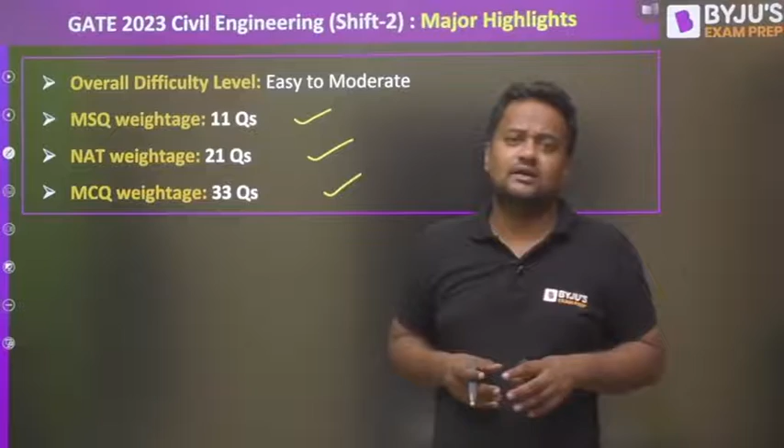This ratio is expected, that most questions will be MCQ, then NAT, then MSQ. Regarding the distribution, it is same as the forenoon shift, and almost same as any other year. Engineering mathematics is always 13. One change is that strength of materials weightage is a bit higher here. In the last 5 years, strength of materials weightage was not much, 4 or 5 marks, but in this paper it is 8 marks. Apart from that, geotechnical will again be highest, and environmental engineering is 13 as expected. So everything is as per convention.

Comparing forenoon and afternoon shifts, mathematics of 2023, and of any year, has to be 13 and 13 from now onwards. SOM is more in shift 2, hydrology is same, engineering mechanics was only in shift 1. Geotechnical engineering is almost same, structural is almost same, surveying is almost same. So the rest of the subjects have roughly equal weightage in shift 1 and shift 2.

Now let me go to each of the questions of strength of materials, geotechnical engineering and surveying, so that you get detailed solutions. After me, other faculty will take their respective subjects in the session. I hope this session gives you an idea about the GATE exam and helps in your better planning for upcoming GATE years.

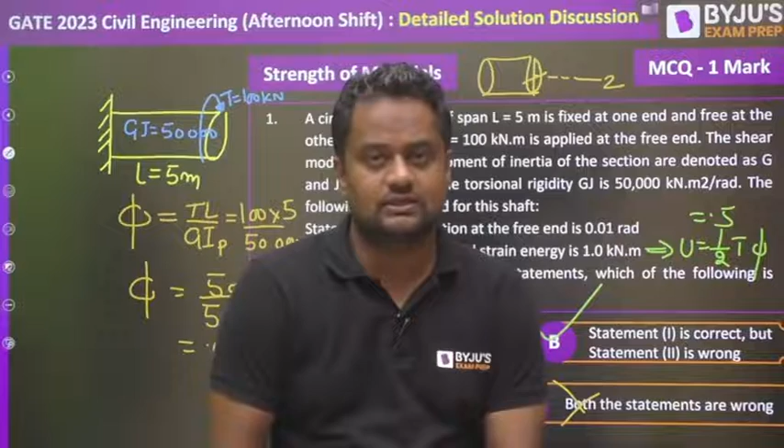Option number B. As far as the difficulty level of this question is concerned, most of the students have done it correctly.

Now moving forward to the next question. Let me quickly go to the next question. Okay, this is the question. You can easily do this.

When a simply supported elastic beam of length L and flexural rigidity EI is loaded with a uniformly distributed load W, the deflection is given by this expression. Here this is the deflected shape, and this is delta naught.

If it is loaded on half of the span, the mid span, what will be the delta? And if it is loaded here instead, what will be the delta? I know that if I apply the principle of superposition and add this, it will equal this.

So 2 delta is equal to delta naught. So delta is delta naught by 2. That is option number A.

I guess you can solve this if the same type of question comes again. It's not very difficult, it was a 1 mark problem. Now let me go to question number 3, which was an MCQ worth 2 marks.

Now let me tell you an interesting fact about this question, something you've heard before: the concepts are the same, only the numeric values change across competition exams. The concept has to stay the same, concepts are limited, and every year thousands of questions are floated in various competition exams.

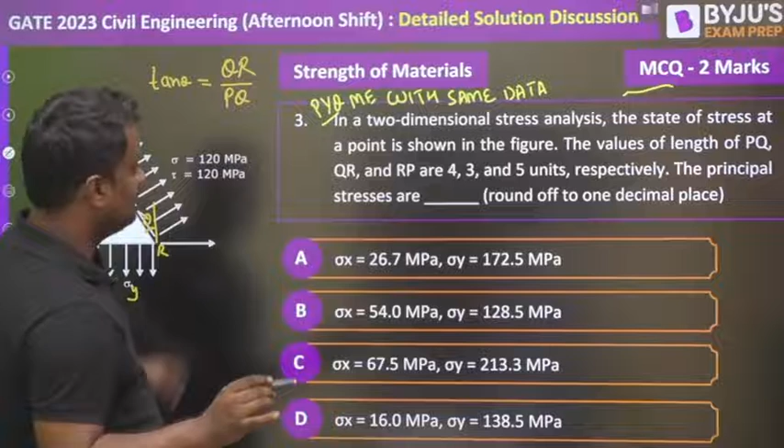Here, this theta: tan theta is PQ, let this be R, this is sigma y. So this is perpendicular, that is QR, upon base, that is PQ. QR is 3 and PQ is 4, so tan theta is equal to 3 by 4.

From here, the value of theta you get, I've already calculated, so time is not wasted, is 36.87 degrees. Now the principal stresses are asked.

Now if I find the sigma x dash value: sigma x dash equals sigma x plus sigma y by 2, plus sigma x minus sigma y by 2 cos 2 theta. What is theta here? 2 into 36.87, plus 0 because tau xy will be 0.

Because in the xy plane, I'm considering this x and y, there is no shear stress in the xy plane, so tau xy will be 0 here. Now, if I write tau x dash y dash, what is this sigma x dash at theta angle?

This is 120. Now, if I write tau x dash y dash, this value is minus of sigma x minus sigma y by 2, sine 2 theta, that is 2 into 36.87, and tau x dash y dash value is again 120.

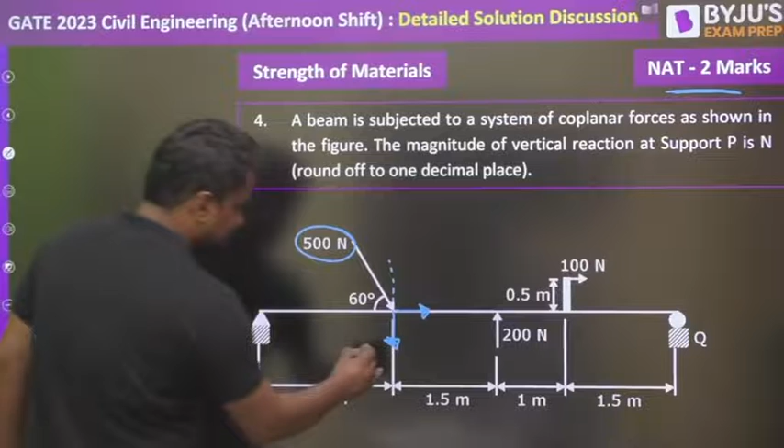Now let us find the values. If I convert this, removing this and converting it here in vertical direction, and one is horizontal direction. In vertical direction, the value is 500 into sine 60, that is root 3 by 2. And in horizontal direction, the value is 500 cos 60, that is 250. So horizontal load is 250 and horizontal load is 100.

So net is 350. That will be balanced because this can provide the horizontal reaction at point P. This is the horizontal reaction at point P.

Now, taking moment about any point has to be 0. Summation of moment about any point Q has to be 0. Now, if I take the moment of HP it will be 0 because it is passing from Q. I take clockwise as positive, anti-clockwise as negative.

And this 500 root 3 by 2, it is anti-clockwise and the distance will be 4.

Now this is 200 Newton clockwise, 200 into 2.5. Now that is 100, and 100 is applying anti-clockwise. The distance for 100 is not passing from Q, so 100 into 0.5 is also clockwise.

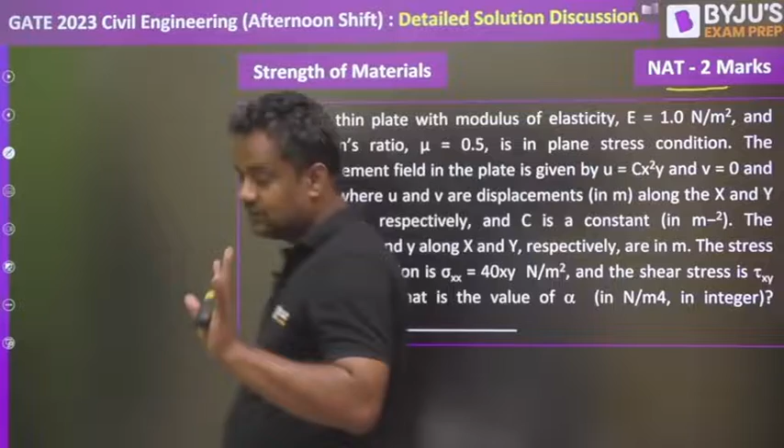Now, I can say that this is the toughest question of both the shifts. Out of the 130 questions, I am considering this the toughest one.

A 2D thin plate with modulus of elasticity... let me tell you here the answer will be 5, but many persons gave the answer 7 before the release of the answer key. At that time I came up before the release and told that the answer will be 5, and I also gave the logical and conceptual reason why 7 will be wrong.

Because when students find the answer 7, they write me mail or telegram. The blunder mistake there is using stress by strain equals Young's modulus somewhere in between. That equation is not applicable here, because stress by strain equals Young's modulus, Hooke's law, is valid only for unidirectional loading.

Here it is a biaxial stress, a plane stress condition, not unidirectional stress. That is why they are getting the wrong answer 7. Even before the release of the answer key, I told the answer will be 5. But in fact, IIT has given the answer as 5.

Now, a 2D thin plate was something like this, and in x and y direction at any point, the displacements are u and v, with u equal to cx square y depending upon the x and y coordinates of this point, and the v displacement in y direction is 0.

Now, we know from the strain-Rosette chapter that sigma x is equal to Young's modulus upon 1 minus mu square, times epsilon x plus mu epsilon y. From the strain-Rosette chapter, everything is given here. Sigma xx is given, and shear stress tau x is alpha x square.

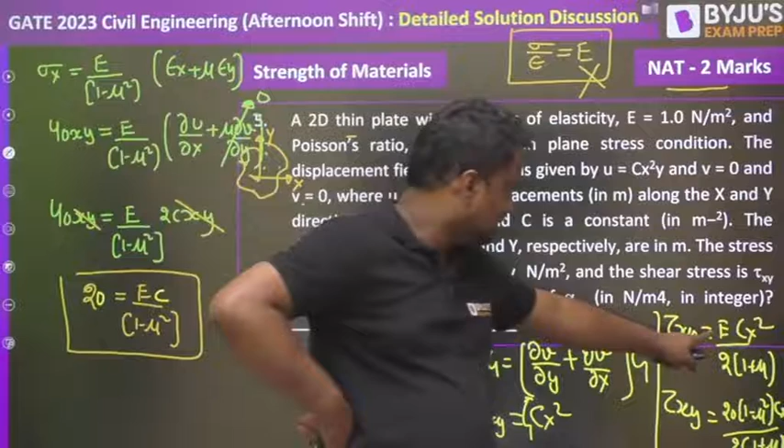Now here it is alpha x square, and 20 I have written it as tau xy was this, E into cx square upon 2 into 1 plus mu, and instead of EC I have written 20 into 1 minus mu square upon 2 into 1 plus mu. Instead of EC I have written, so after that it will not be cx square, it will be only x square.

So tau xy is also written as alpha x square. This means this whole term will be alpha. Let me take this color. So this means this is alpha x square. From here, alpha value is 20 into 1 minus mu square, 1 plus mu, 1 minus mu divided by 2 into 1 plus mu. So this will be 2, 20 will be 10, cancelled. 10 into 1 minus mu. What is the value of mu?

0.5. So 10 into 1 minus 0.5, that is 10 into 0.5, so the answer will be 5.

This is the trickiest and most difficult question out of all 130 questions in the 2023 civil engineering paper. Let me tell you frankly, these kinds of questions are answered by only 0.1 or 0.01% of students. I'm not saying those who attempt this will get top ranks. A student who isn't calm and composed might take this as a challenge and waste so much time that he misses other questions. In the exam, it's not about taking challenges, it's about fetching maximum marks.

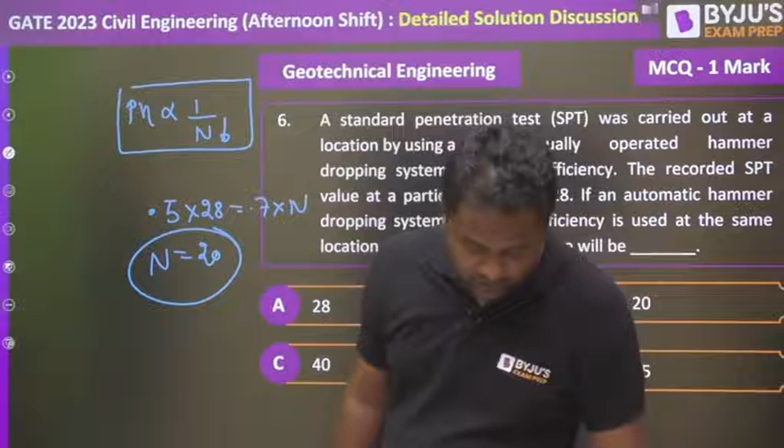Now this is the question, guys. Till now, at present when I'm making this video, the question paper and response key and answer key are released, but the final answer key which comes after the challenge is not yet released. This question was asked on 12th February. On the same day, I told that the answer will be this. IIT has given this only. But then many students had some ambiguity. Let me clear all the ambiguity today. This has been challenged, and most probably it will be accepted. Let me tell you the reason, guys.

For the Laplace equation, to use its properties, this is the equation derived from the continuity equation. Ky and kx equal to 0. To simplify, for isotropic soil, kx and ky are cancelled. So it becomes a simple Laplace equation from which we can use its property.

But what happens when kx is not equal to ky, that is, isotropic conditions are not there, when it's anisotropic soil? Then there is a two-step derivation, which I'm not going into. In that, we change the x-axis.

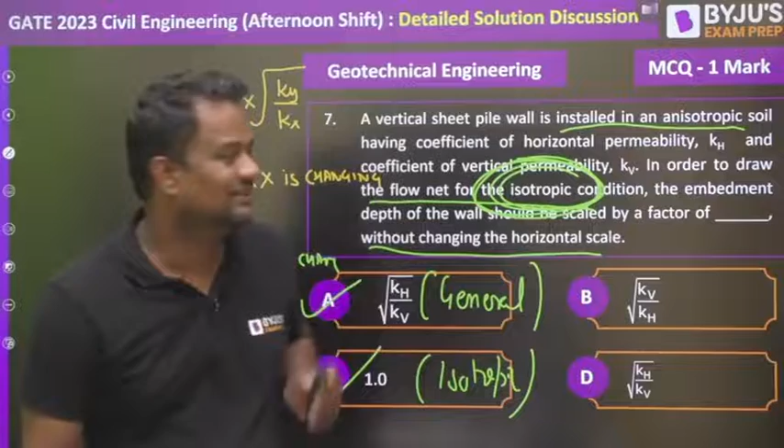Now let me go to question number 8. Guys, this was the MSQ question. Now what is very special about this MSQ question? From the day in August 2020, when IIT Bombay announced that a new type of question will be coming, MSQ, 2021 was the first year when MSQ came. Now in 2021 when MSQ came, what happened? I'm always telling you, those who are my followers on YouTube, those who are my students, they might be knowing this, that every time in an MSQ session I say that MCQ is a subset of MSQ.

MCQ is a subset of MSQ. MSQ means a student thinks 2 is correct, 3 is correct, 4 is correct. No, in MSQ maybe 1 may also be correct. So MCQ is also a special type of MSQ, and this happens here. I was saying since 2021 that a question will be coming where only 1 is the answer. This is it. So guys, IIT has given this answer.

Guys, Young's modulus is changing. As the footing changes, E is changing here, E may be more or less. Young's modulus is changing, and when Young's modulus changes for a particular stress, strain will be different. Strain will be different, deflection will be different. This causes non-uniform settlement, because settlement is related to Young's modulus. More Young's modulus, less settlement. Less Young's modulus, more settlement. And when settlement is changing, stiffness is changing too, because stiffness is related to delta, K is P by delta. So B is the answer.

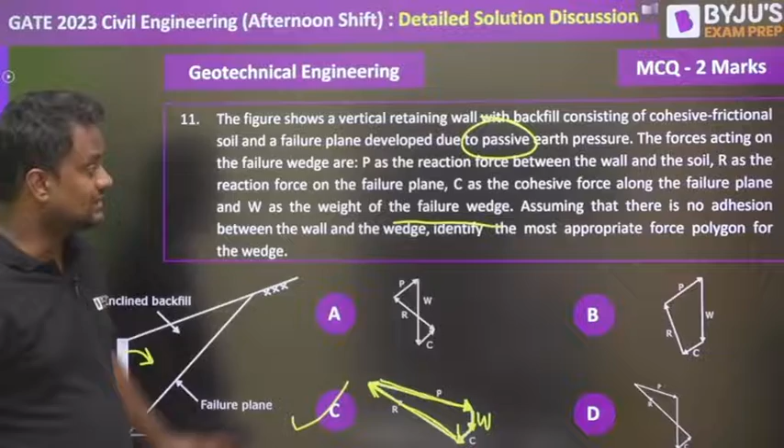Now let us come to the square footing designed to carry a column load of 500 kilonewton. A square footing has to be designed B into B for carrying a load of 500 kilonewton. This is the ground level. Now bulk unit weight is 19, angle of internal friction phi is 0, that means it is a cohesive soil. Cohesion C value is 25. Considering the depth of footing as 1 meter, DF is 1 meter.

Meyerhof bearing capacity theory is used. It is quite very difficult to digest that a question of Meyerhof is asked, because usually questions of Meyerhof are not asked in the GATE examination or other examinations. So we have to design it on the basis of Meyerhof.

Now as per Meyerhof, with factor of safety, the width of the footing is asked. So what is the value of QU? It is square footing, so it will be C into shape factor SC, DC, IC, then Q into SQ, DQ, IQ, and half B gamma N gamma into S gamma, D gamma, I gamma. Now what are these shape factor, depth factor, and inclination factor?

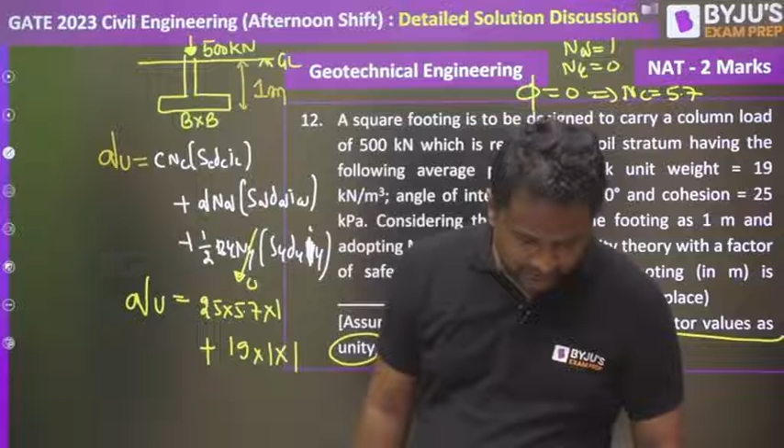C, what is C? 25 into 5.7 into 1, plus Q, what is the unit weight? 19 into 1 into 1. What is this value coming? Sorry, for Meyerhof phi equal to 0, it will be 5.14.

What value are you getting? Please calculate and let me know the values. I have already calculated, where is that? Everybody, please let me know the values that you are getting. So from here the value you are getting is 147.5.

147.5. So what is the net ultimate bearing capacity? QNU is QU minus gamma DF. So DF is 1, gamma is 19. So QNU value is 147.5 minus 19, that is 128.5. Now what is allowable after factor of safety, net safe QNS? That is 128.5 divided by factor of safety 3, and I have calculated this value is coming to 42.83.

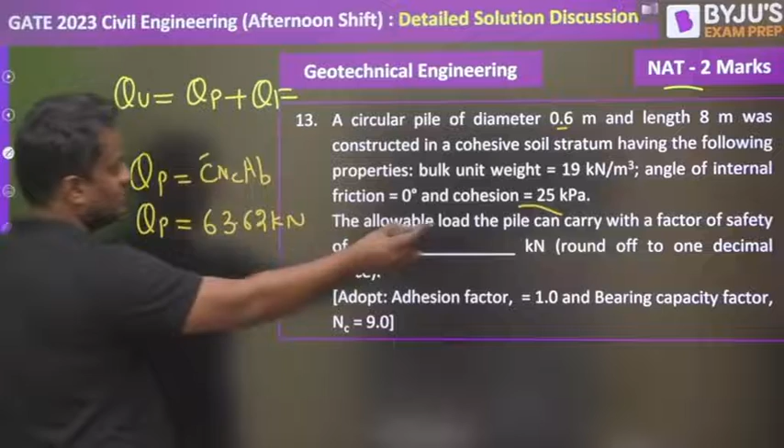So QP is C into NC into area of base. What is C? 25. What is NC? 9. What is area base? Pi by 4 d square. So C is given, NC is given, A base is given. From here, the QP value you are getting is 63.62 kilonewton, because C is 25, NC is 9, unless given. So area base is pi by 4 into 0.6 square. Since it is point bearing, stress into area, point is acting at the base.

Now QF is alpha CAS. Friction is on the surface, so stress into area. What is the surface of the pile? Pi dl. So D is given, L is given, pi you know, C is 25, and alpha value is given, bulk unit weight is given, angle of internal friction is 0, the allowable load of pile NC is 9, adhesion factor is 1, so this is given. So you are getting Q friction, Q surface as 377.

So 377 plus 63, ultimately the value of QU you get is 440.62, and it is asked for Q allowable. So Q allowable is 440.62 divided by factor of safety, that is 3. If factor of safety is not given in a pile case, we take it as 2.5, but here it is given as 3, so it will be 146.87. And the range given by IIT for this particular problem of 146.87 was 145 to 149, as per IIT Kanpur.

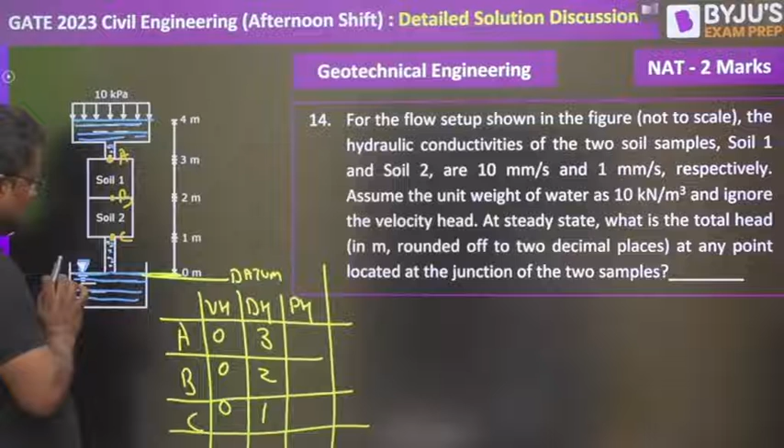Now pressure head. The pressure head at point A: 10 is this, plus 10 into 1 meter of water, so total pressure is 20. This is 10 of extra load and 10 into 1 of water, because this is 1 meter, so 20. This unit weight of water is not 9.81, it is 10. So 10 is the external load, and extra pressure of water is 10 into 1, so 20 pressure. So what is the pressure head? That means it is equivalent to 2 meter water, because 10 into 2 is 20. So pressure head is 2.

So if I write total head here, it will be 5 here. I don't know here, and here also I don't know. Okay, so this is the case.

Now, my friends, this is a perpendicular case, so the Q will be same here, because perpendicular means the discharge will be same. Now, from here, if I want to find out the value of discharge, please see.

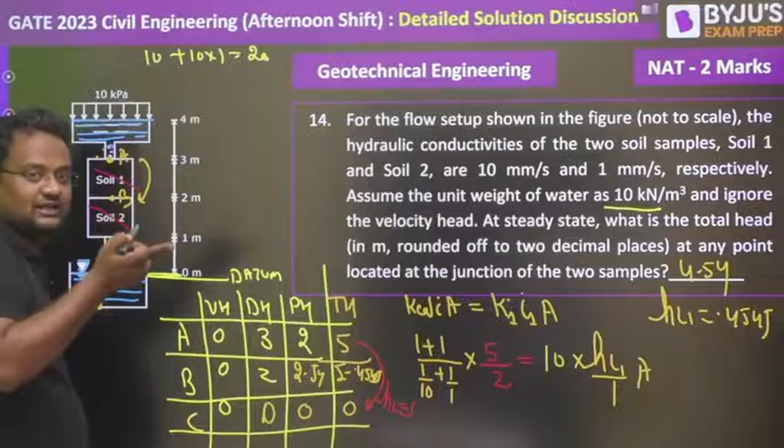So if this is 4.54, what is this? 2.54 is the pressure head. Because this is not a hydrostatic condition, you cannot measure pressure from there, or including this 10 also, you cannot measure pressure - this is not hydrostatic. So here total head comes first, then the pressure head. Although total head is asked, so it is 4.54, and the range was given from 4.5 to 4.6.

Okay, now let us go to the next question. The next question is question number 15, 2 marks, and it is again on soil mechanics.

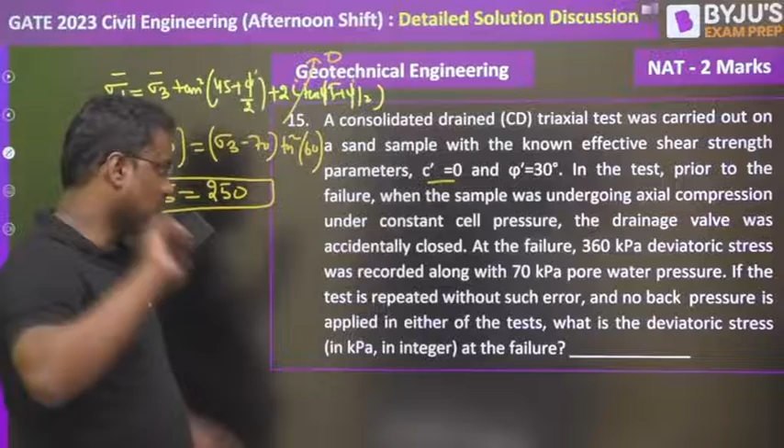One equation, one unknown, everybody can find this. Now what is happening? If the test is repeated without such error, that means now it is not accidentally closed. So pore water pressure is allowed to dissipate out. Let us work on the total stress, because pore water pressure will eventually go. Drainage was not closed, it is open, so it will go. So let us work on the total stress.

Guys, if this was an MCQ, I know the answer will be more than what is the deviatoric stress here. 360, deviated stress was 360, it will be more than here. The answer will be more than 360.

How do I know this? Because earlier the pore water pressure is not dissipating, effective stress is not changing. How much you increase the sigma, that much the increase in U, because pore water pressure is not dissipating. So effective stress is not increasing, it will stay same. But here you are increasing the sigma, U will dissipate out, so eventually sigma bar will increase.

And when U is not there, that means sigma bar is more. Sigma bar is more means more bonding. More bonding means more load is required to break it. So again applying the same expression, working on total stress now, tan square 45 plus phi by 2.

Sigma 1, what is the deviatoric stress? If the test is repeated without such error and no back pressure is applied. Now guys, no back pressure is applied, please remember this.

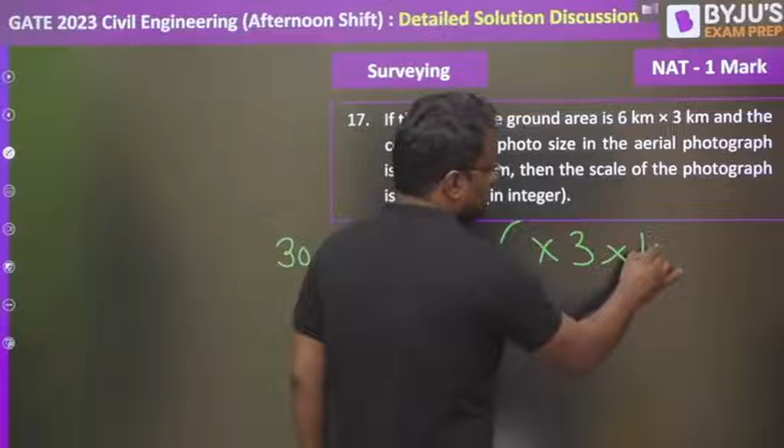Okay, now size of ground and size of photo is given. What is the scale? 1 by S. So if I multiply 30 into 15 by scale square, if I multiply this area by scale square, it becomes the area of ground, that is 6 into 3, multiplying this kilometer into centimeter, so this much meters and this much centimeter, again 2 times. So multiplying the area of photo into scale square, because it is area, it will be ground. So S value comes to be here 20,000.

And range is also given from 20,000 to 20,000 only. Okay, now this is the question. I have told this on the exam day also.

This is suppose north, this is suppose east, this is suppose south, and this is suppose west. North, east, south, west. Now what is happening here? Please check everybody.

Let me take the values I have already calculated so that the time is not wasted. I have done this on the exam day also. Okay, please see.

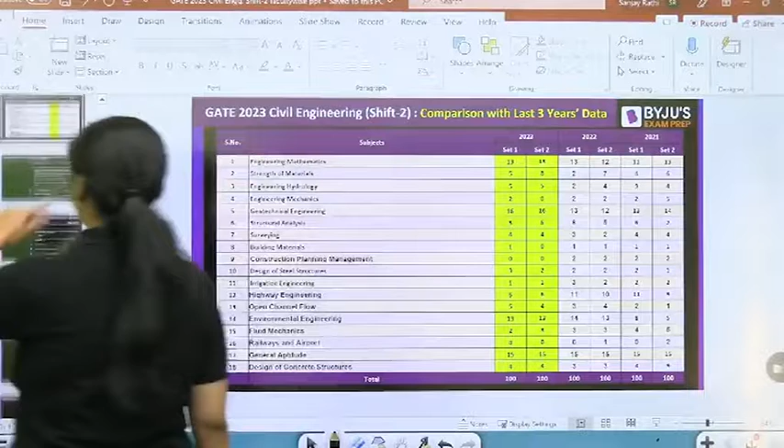I personally believe that the hydrology questions asked were very easy. So let's start, we'll be solving from the hydrology part.

Horton's equation is related to infiltration. Muskingum method is the channel routing method. Penman's method is used for evapotranspiration, you get potential evapotranspiration from it. So the matching is 4, 5, 3 - option A will be the correct option.

Coming to the next question: if you remember in past years they asked with a square, now it's a circle. Very simple - a catchment is given in the form of a circle with radius 30 kilometers. There are 5 rain gauges given, with corresponding rainfall values, and you're asked to calculate the average rainfall using Thiessen's polygon method.

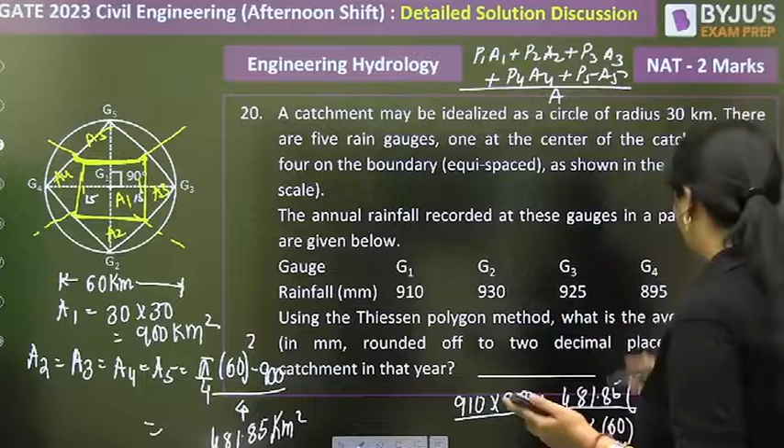Now let's calculate: with values 910 into 900, then 930, 925, 895, 905, divided by pi by 4 times 60 square - don't waste time writing A1, A2, A3 separately, that's just wasted effort. This comes out to 912.545 mm, so this will be the answer. Very basic question.

Very, very basic question. Now, this next question was conventional - generally we deal with it for ESE conventional, but it has been asked here so we have to deal with it. The cross average depth is given, and velocity at different depths is given, you have to calculate the discharge. Total discharge will be the sum of discharge at segments 1 through 7. Discharge equals area into velocity.

How can you calculate it? Velocity is given, and for area, width into depth is used. Now how do you proceed? The channel is divided into 7 segments, and the width of each and every segment is 1.5 meters.

1.5 meter. So if you remember, only the first segment and the last segment will remain as it is. W1, bar 2, 3, 4, 5, 6 will remain same, and W7 bar will be same. Like if you talk, it will be W1, W2.

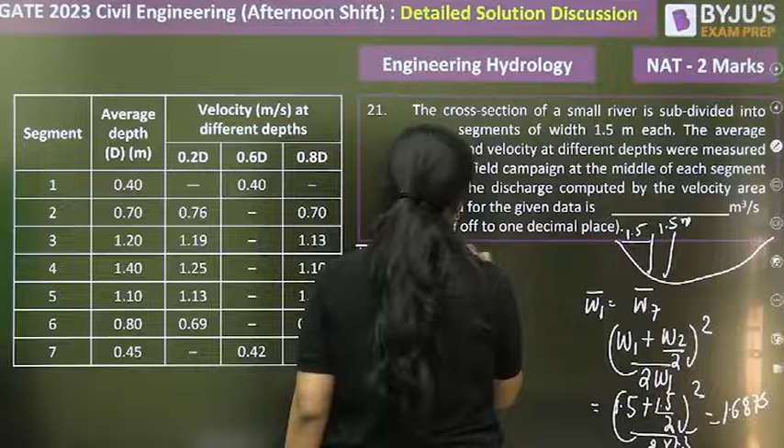Apart from that, W2 bar, W3 bar, W4 bar, W5 and W6 bar will be same. That is, 1.5 by 2, half of first section plus half of second section. So this will be 1.5 only.

So I got the width at each section. Width is known, depth is known, I will get the area. Talking about the velocity, if it is given, I'll do it here only so that we don't have to turn the pages. Velocity, if it is given 0.40 here, so this is 0.40.

Here it is given 0.42, it is 0.42. Here it is given velocity at 0.2d and 0.8d from the free surface. So we know that we will take the average of it, that is velocity at 0.2d and velocity at 0.8d. So this will be how much? 0.76 plus 0.70 divided by 2, this will come out to be 0.73.

This will be 1.20. I should not look at this side, otherwise I'll make mistake. I'll check it out otherwise, because so many things are there, the chances that you can commit mistakes. 0.73 it was there. 1.19 plus 1.13 divided by 2, this will come out to be 1.16. Then 1.25 plus 1.10 divided by 2.

So this will be how much? 1.175. Then 1.13 plus 1.09 divided by 2, that is 1.11. Then we have 0.69 plus 0.65 divided by 2, that is 0.67. Clear? We got the velocities.

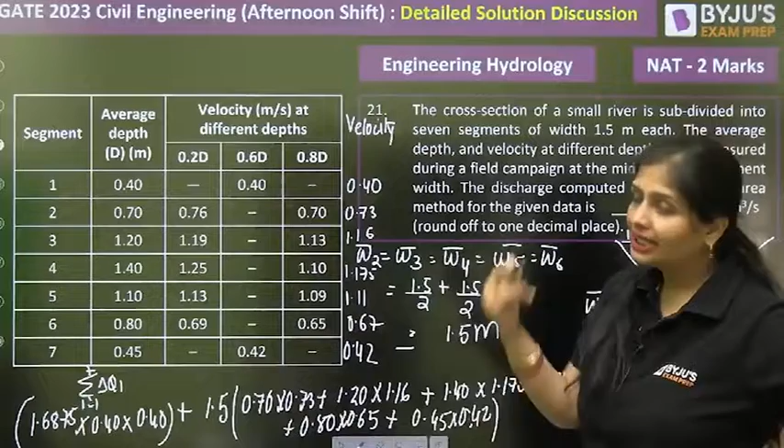See, all these calculations you have to do with virtual calculator. So if this question comes, and if in future also it comes, mark for review, proceed to the next questions. When you are done with all the questions, then come to this question. Otherwise this question is not something, beta, which will take 2-3 minutes of time only. The question is simple, the thing is you have to do it on your virtual calculator. That's the issue. And you cannot miss anything. And you can see here they are not whole numbers, they are decimals also there.

Okay, last one is 1.6875 into 0.45 into 0. Come on guys, you also solve, I'll also solve it. I'm moving out so that you can see and solve it faster. Solve it faster.

1.5, I have taken common for 2, 3, 4, 5.

Okay, now this question, what is given to you? A compound is given to you. This you can apply your common sense also. A compound symmetrical open channel flow section is given to you. It is asking the maximum of critical depth, or depths, because one option is also given to you.

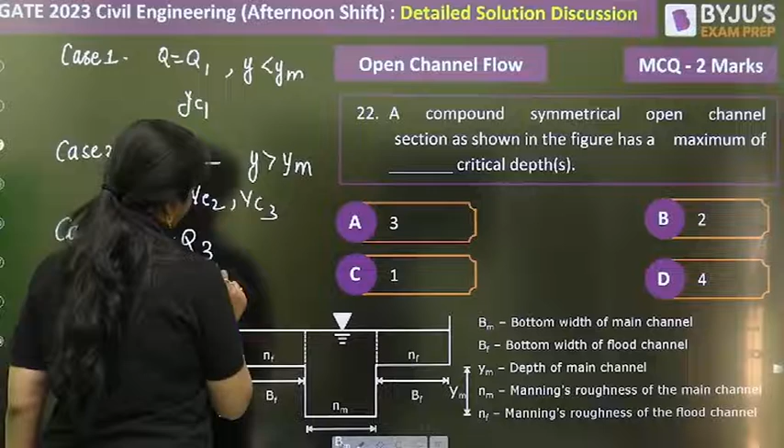Now case 3, when discharge is equal to Q3, what will happen here? YC3 will exist. So tell me, three critical depths in this case one critical depth, in the last case one critical depth, but in the second case you are getting three critical depths. What will be the answer? Tell me fast, because it is asking maximum. So the maximum will be 3.

Now I'll show it to you with the help of a diagram also. You know this diagram very well. Just a minute. Step, and let us take it as Ym. This is Ym.

Firstly, what was given to you? Q is equal to Q1. So we will take it like this, this is exactly freehand. This is Q1, and here you will be having YC1.

Okay, next is what? Q is equal to Q2. So again I'll draw it, just a minute, this went wrong, I'll take it another way. This is Q2, and remember discharge is increasing, Q3 is greater than Q2 is greater than Q1, this condition is well known to you. So here also you will be getting 3: YC1, YC2, YC3.

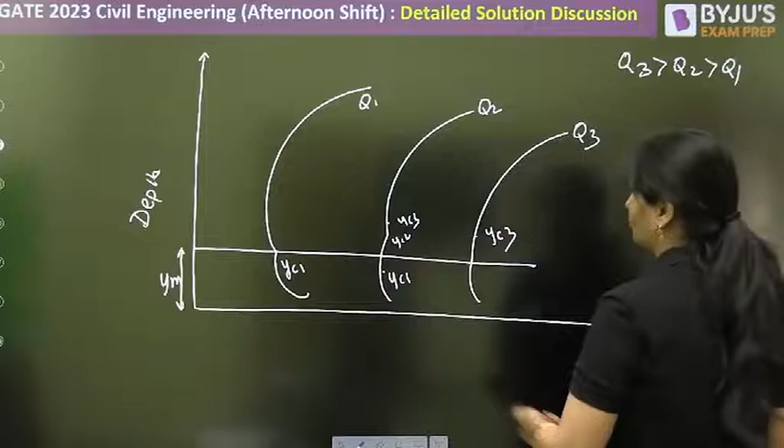Or basically, if you are not interested in this, go through the formula. See, here the width also goes on changing with respect to the level of water.

Okay, with respect to the level of water, you can see here it is BM, main width, the depth of bottom width of main channel, bottom width of flood channel. So the width is changing. So discharge per unit width will change, and ultimately critical depth will change. So you can go through that concept also.

Okay, I always forget this. Okay, this question was damn easy. So here till now they have not ever in their numericals taken kinetic energy correction factor. It was an ESE conventional they used to take, but here they are talking about kinetic energy correction factor.

So you know, for critical flow condition, Q square T upon GA cube is equal to 1. But since here kinetic energy correction factor is there, we have to take alpha also into consideration. So now if you see alpha, since it is critical, this will be critical, this will be critical. Alpha Q square by G, you are just transposing it, that's critical. So here out of the options, you will be getting this. A will be the correct option.

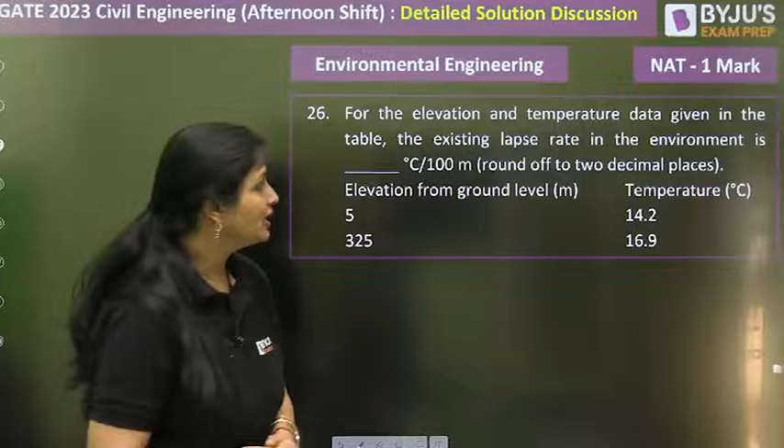Okay, this question gives elevation from ground level and temperature. It is asking you the existing lapse rate, that means the environmental lapse rate. One thing let me tell you, many guys got confused and did it wrong. Here, with increase in altitude, temperature is also increasing. That means it is the case of negative lapse rate, because lapse rate we call when, with increase in altitude, temperature should decrease. But here temperature is also increasing. So your calculation will remain as it is, there will be no change in that.

So what is environmental lapse rate? We call it delta T by delta Z. So how much is the temperature change? 16.9 minus 14.2, and 325 minus 5. This is in degrees Celsius and I'll convert it into meters. First, let me get it in meters, because it is asking you in degrees Celsius per 100 meters. See, units in NAT questions, I have told you n number of times, just see in which units they are asking. Otherwise, you did all the calculations, but that is of no use. Come on.

How much is it coming? 8.4375, we have to do it for 100 meters. So this will come out to be how much? Just a minute, 16.9 minus 14.2 and this is 320. So firstly, this is coming out to be 8.4375 into 10 raised to power minus 3 degree Celsius per meter. So for 1 meter you are getting this much, so for 100 meters you will be getting how much?

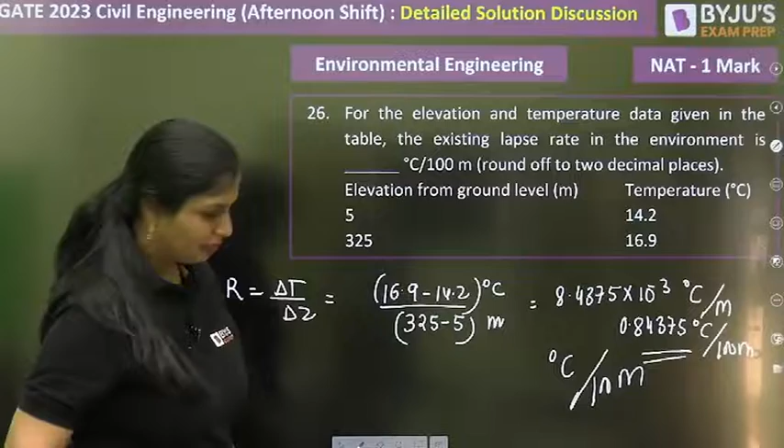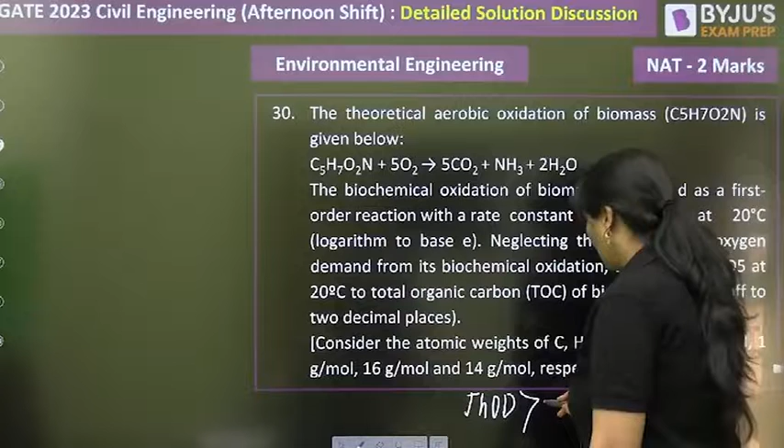So remember one thing, which every time during these conceptual classes I tell you: theoretical oxygen demand is greater than COD, COD is greater than BOD ultimate, and BOD ultimate is greater than BOD 5.

Now technically, firstly I'm saying that all the waste which is there is biodegradable in nature. So for calculation purpose, I'm assuming that theoretical oxygen demand and BOD ultimate are the same. In actual, it's not there - somewhere TOD is on the higher side, because on a theoretical basis we assume complete decomposition of organic matter. But here for calculation purposes, we will take theoretical oxygen demand and BOD ultimate to be equal.

So now guys, first we have to calculate the molecular weight of C5H7O2N. Carbon 12, hydrogen 1, oxygen 16, nitrogen 14. So 5 into 12 plus 7 plus 2 into 16 plus 14, that gives 113 grams.

So 113 parts, or grams, of C5H7O2N requires how much amount of oxygen? Oxygen 32 into 5 requires 160 grams of oxygen. So if we talk about 1 gram, how much will it require? 160 divided by 113, that is 1.415 grams of O2. This much oxygen is required - this is the theoretical oxygen demand.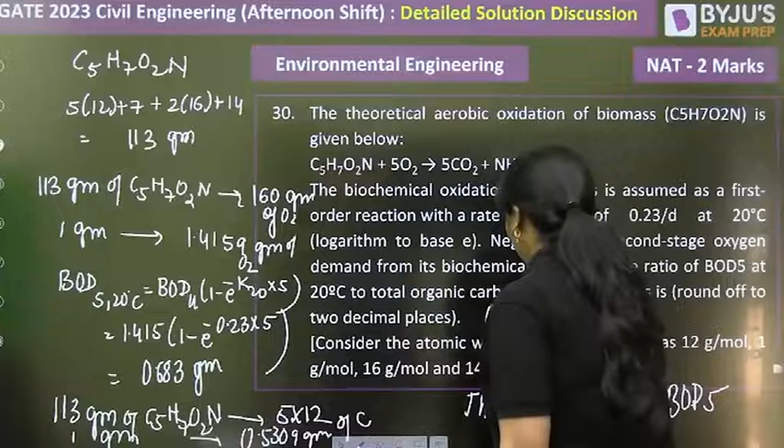Now I have to calculate the ratio. Ratio will be 5 days, 0.683 divided by 0.5309. How much will it come? 1.286. So this will be the ratio. 1.28 will be the ratio if it's asking to round off to 2 decimal places.

Clear? Now next question, this is the last question I guess. So here what is given to you? This question was very simple. It looked scary but was actually very simple. Let's talk about it.

Here 7 river segments are given to you. Flow rates, concentration, everything is given. Now here discharge is given, Q1, Q2, Q3, Q4, Q5, Q6, Q7. You have to tell how much is the concentration at segment 7.

Very simple question. The rest of the conditions, there is complete mixing taking place, all those conditions are there. Now if discharge 1 and 2 is given, 3 is not given, so you can calculate using the simple continuity equation. Q1 plus Q2, so 5 plus 15, that is 20 meter cube per second. This will be Q3. Now what will be Q5? Q3 is coming, Q4 is also subtracted from it, discharge is added to it. So Q5 will be how much?

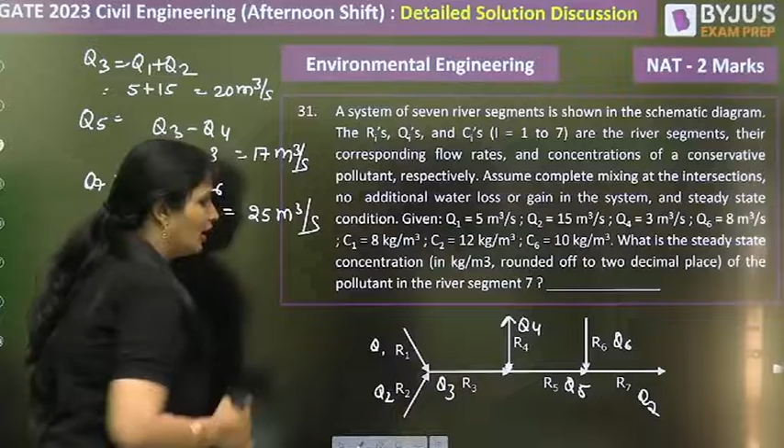So you got the discharge, but you will say ma'am, what to do with the discharge? I need to get the concentration. So if you want to calculate C7, firstly you should know C6 and C5.

Do you know C6 and C5? C6 you know, but C5 you don't know. For getting C5, you have to come backward direction. So first you have to get C3. Whatsoever value of concentration at C3 you will get, same concentration you will get for C5.

So let's talk about it. So what will happen here? If you want to get that, so this will be Q1 C1 plus Q2 C2 divided by Q1 plus Q2. This will give you the concentration of C3. How much is Q1? 5.

You have to be very careful. A little shift here or there, be careful. Minute mistakes you did, it's gone. So C1 is how much? C1 is 8. Plus Q2 is 15. C2 is 12. Divided by 5 plus 15.

How much it is coming? Let's check it out. So 5 into 8 plus 15 into 12 divided by 20. So this will come out to be 11 kg per meter cube.

So whatsoever is the concentration of C3, that will be the concentration of C5. There will be no change in it. So don't think that something is extracted. Concentration per meter cube will remain same. There will be no change in it. And even C4 is not given to you because it's not required also.

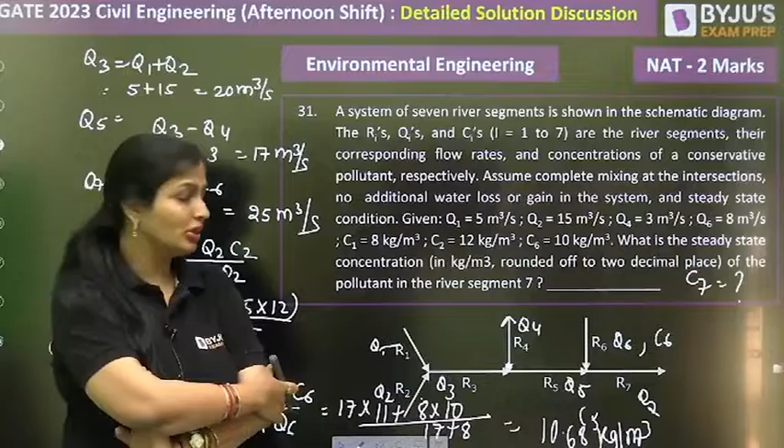Now people will think one more thing. One of my students was saying, ma'am, I was getting 10.68, but I was not confident. I said, why? You did everything correct. Although I marked 10.68, but I was thinking, shall I mark 10 or shall I mark 11? I said, why do you think so? Because every other concentration given to you is in whole number, there was no decimal in any of that. If you check it out, C1, C2, C6, every concentration was in whole number. So he was saying, ma'am, I was having a doubt, but I was not finding it logically correct, so I wrote 10.68. Luckily, he didn't follow that basic instinct that it should be a whole number.

There was nothing environment in this. This is basic, you can say, hydrology. You used to do that mixing depth and all, it's that concept. Okay, so I guess now this whole environment, open channel flow and hydrology is clear to you. Now Krishna sir will be coming up next with structure analysis. So you'll be going there, and if in case you have any doubts, feel free to contact me. Thank you so much, guys.

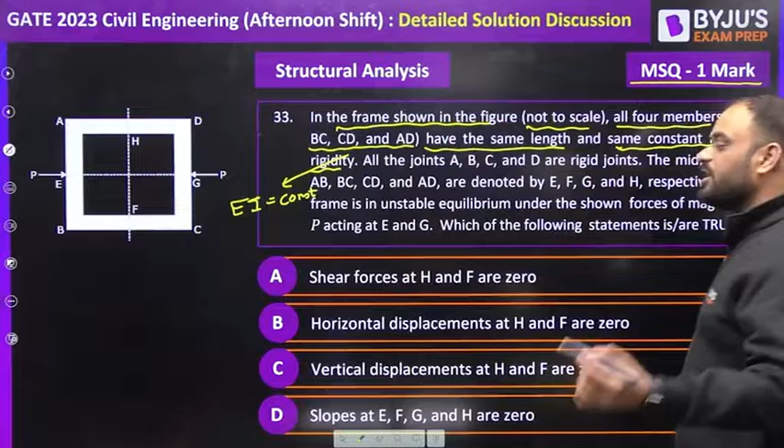Now all the joints, whether it is A, B, C and D, are rigid joints. Now the midpoints of AB, BC, CD and AD are denoted by E, F, G, H, which is marked over here. You can see here guys, E, H, G and F, correct?

Now the frame is in unstable equilibrium under the shown forces of magnitude P acting at E and G. Which of the following statements is or are true? Now guys, these are the statements given to us, and we need to understand how to get the answer of this particular question.

So to get the answer, you need to know what should be the BMD, what should be the deflected shape of the structure. So guys, what we will do first, we'll try to draw the BMD as well as the deflected shape of the given structure first.

Okay, so let me show you the BMD of this particular structure. Kindly see this. So this is our box frame. Let me use a different color so that it will be properly visible to all of you. Now, kindly see this, this is our box frame.

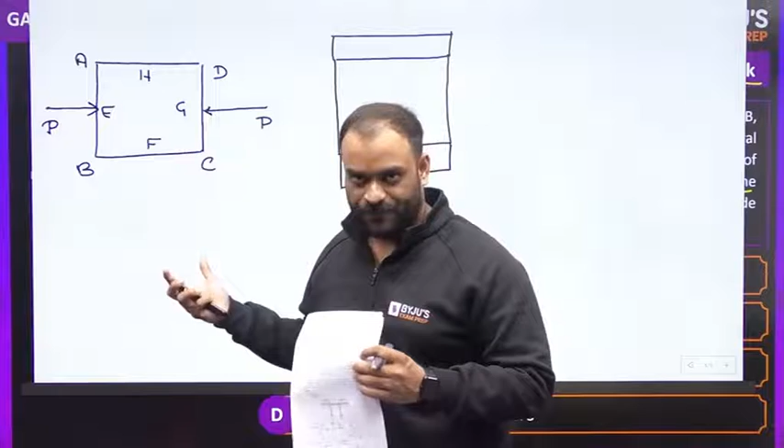Guys, how can we draw this particular BMD? If you have solved this particular type of box frame in your practice duration or in your learning duration, then only you can draw it. Otherwise this is a very lengthy process to draw the BMD and the deflected shape of the given structure by using MDM. So that's why guys we are trying to draw it directly, and you can see here, this is our BMD basically.

This is our BMD, getting a point? Now let me mark, this is positive, this is negative, this is negative, this is negative, this is negative, this is positive, this is negative, and this is negative. Okay, so this is basically the bending moment diagram.

Now what should be the deflected shape of the structure? Now you can see here, if you have a load which is applied in this particular direction and in this particular direction, then the box frame is trying to compress in this way, right? So definitely these two joints are trying to deflect in the vertical direction. So let me show you the deflected shape of the structure.

So guys, what will happen? This particular joint, this joint and this joint as well as this joint, all the joints will try to rotate. Okay, so let's rotate it first.

Okay, now this particular portion will be like a curve, like this, and this is also a curve like this, but this one will be different. We have some point of inflection over here, right? Similarly, on this side, we have some point of inflection again, like this. So these are basically points of inflection, and this is our deflected shape of the structure. Getting a point? So this is nothing but our deflected shape of structure.

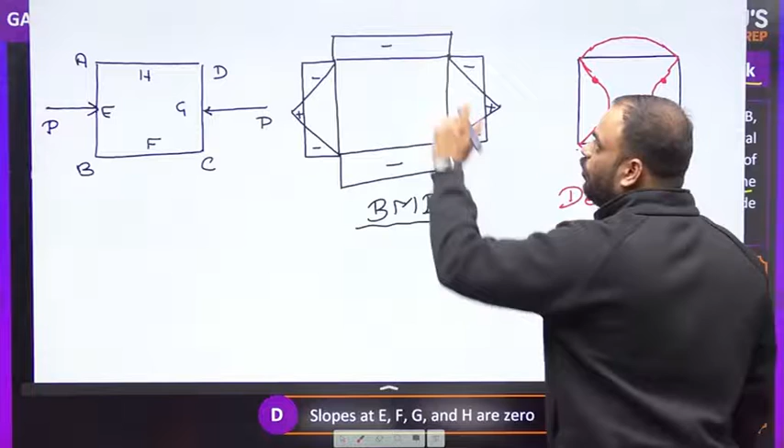Now guys, what are the options given to us? Let's see. The first option is shear force at H and F are 0. To understand this, you need to see this particular bending moment diagram. The bending moment value is constant on this particular span, that means for AD and for BC, the bending moment is constant. And whenever the bending moment value is constant, if you take the derivative of it with respect to x, it will become 0. And the derivative of bending moment is nothing but shear force. So shear force will be equal to 0 on span AD and on span BC. So let's see this option: shear force at H and F are 0. That means at this particular point and at this particular point, the shear force should be 0. Yes, it is correct.

Now the next option is the horizontal displacement at H and F are 0. You know, guys, from the deflected shape we saw, the joint H and the joint F will not move anywhere in the horizontal direction. That's why the horizontal displacement of joint H and F will be equal to 0. So this statement is also correct.

Now what about option C? The vertical displacement at H and F are 0. You know, guys, from the deflected shape, we can see the deflection of joint H in the vertical direction is possible, and the deflection of joint F is also possible in the vertical direction. That's why it is not equal to 0, so this statement is wrong.

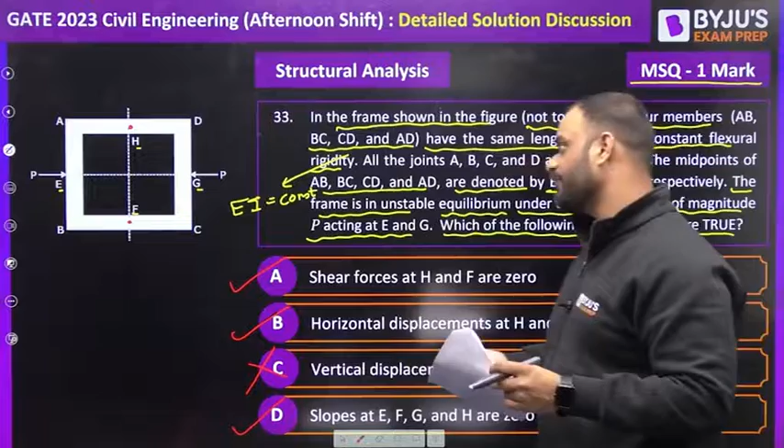Let's move to the next question, which is based upon the structure part. Now this particular problem you can solve by using the slope deflection method also, as well as the moment distribution method. But guys, if you use the moment distribution method, this particular problem will become very easy for us. Okay, so let's understand how we can solve this particular problem.

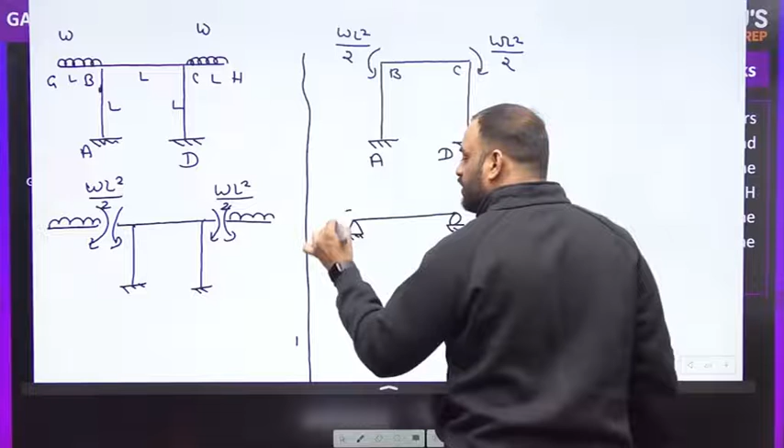But let me tell you one thing. Whenever you have a beam like this, in which the moment is applied from both sides, the deflected shape of the structure will be like this. But in this particular case, what should be the stiffness for this particular part of the beam? The stiffness will be 2EI by L. It is not 3EI by L, it is not 4EI by L. It is 2EI by L.

When a beam is trying to deflect in a symmetric mode, then only the stiffness will be 2EI by L. So in this particular case also, our beam is trying to deflect in a symmetric mode. That's why the stiffness for this particular part will be 2EI by L. So let's write it down: this stiffness will be 2EI by L, this one is 4EI by L, and this one is also 4EI by L.

Now what is our task? Our task is to find out the moment at point A. Okay, so let's do it.

So first what we will do, guys, is try to break it like this. The moment which is coming over here is WL square by 2. Let us suppose the moment at this particular part is MBC and this one is MBA, and this is our column. So as per Newton's third law, this value will be MBA again, and the moment present at point A will be MAB. The value of MAB should be equal to MBA by 2.

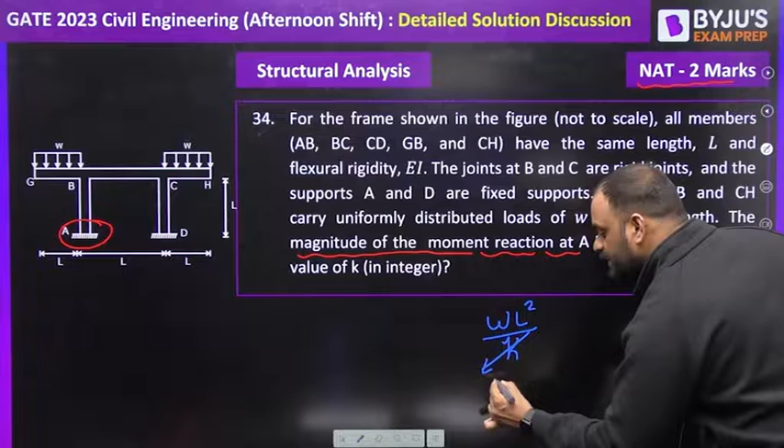Getting a point? So this 6 is nothing but the value of our K. Let me show you the question once. You can see here, guys, this is our problem, right? So our answer is WL square by K, and the value of K is 6. Getting a point or not? I think all of you are able to understand this particular problem, how to solve it, right?

So what we will do first, guys, we'll break the structure from this particular part, from this particular portion, we'll try to break it. So let me draw it. Okay, so let me draw the figure first. So guys, this is the figure which is given to us.

And this is our hinge support which we have, and over here we have a roller, a small roller is there. Let me erase it. Now this is a roller, small roller, through which one member is connected. And on this member we have a 10 Newton load which is acting in a downward direction. Getting a point? Now we have another roller part like this, and which is connected to this particular member with another roller, right? And this is another support which is basically our R support.

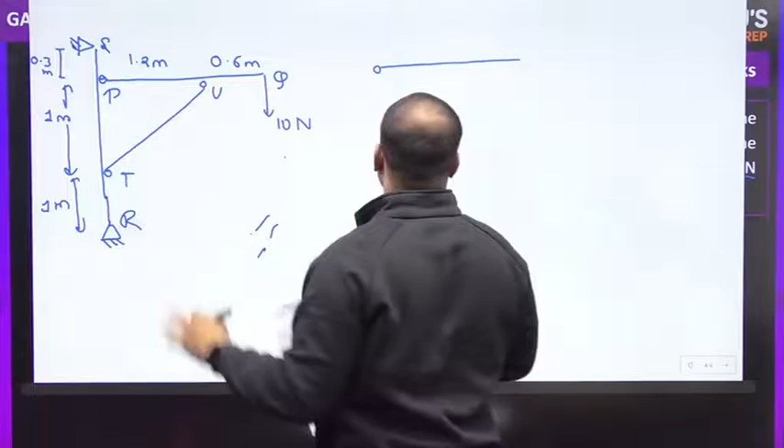Okay, so kindly see this analysis. We have a roller over here. Now, which member is connected to this particular part, which is basically our PQ? Let me write it down. This is P and Q, and this one is S, and this one is T, and this is basically R. Now, which particular member is connected to the PQ member? It is only TU, right? So this TU will try to give some force to this particular PQ portion, right?

So let's draw the free body diagram. So guys, this is our force which is FTU at an angle of theta. Right now we don't know the value of theta, just imagine, okay, we'll calculate it later on. And this particular value is basically 10 Newton. Clear? Okay, now you may have two components of FTU, so one is basically cos and the second one is sine. So we can write here FTU cos theta and this one is FTU sine theta.

Correct? And this particular distance is already known to us, which is 1.2 meter, and the second one is 0.6 meter. So can we write here the moment at point P is equal to 0? The summation of moment at point P is equal to 0 easily, right? So let's write down summation moment at P is equal to 0. So FTU sine theta minus, because it is anti-clockwise, right, multiplied by 1.2, then plus 10 into 1.2 plus 0.6, that means 1.8, and it should be equal to 0, correct? So what should be the value of FTU? Let's calculate it. FTU sine theta is equal to how much?

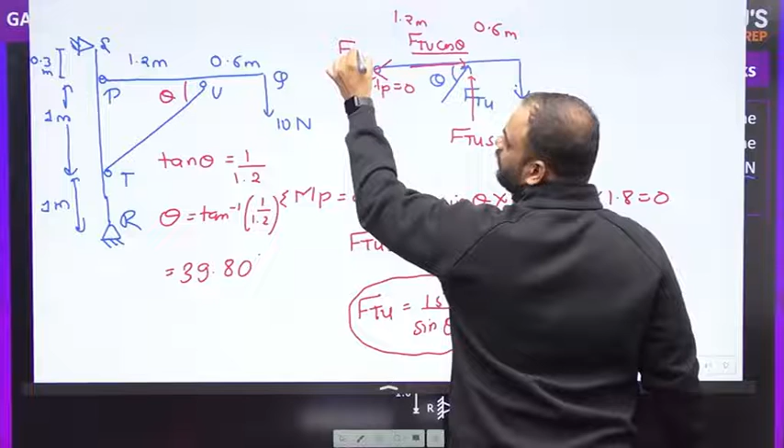Right, now guys, let's solve it further. As you can see here, this is basically FTU cos theta. Now what we need to find? We need to find out what should be the horizontal component of force which is transferred from PQ member to SR member. So can I say that guys, this will be our force, which is nothing as FPQ, and we need to find out the value of FPQ, which we can find out very easily.

We can write here the summation Fx is equal to 0 on this particular part. So it will become FTU cos theta minus FPQ, and it should be equal to 0. So the value of FPQ is equal to FTU cos theta.

Correct? So guys, if you put the value of theta over here, how much is it? Let's see, if you put the value of theta in this particular case, so you will get the value of FTU, which is basically sine 39.80. If you put it, you will get some value. Then after that, guys, what you have to do, you can calculate it. So I will try to calculate the final answer.

FPQ is equal to FTU cos theta, and you know that FTU is equal to 15 Newton divided by sine theta, multiplied by cos theta. So 15 into cos 39.80 divided by sine 39.80. So if you solve this, how much are you getting exactly? It is equal to 18 Newton. So this will be your answer for this particular problem, the correct answer is 18 Newton.

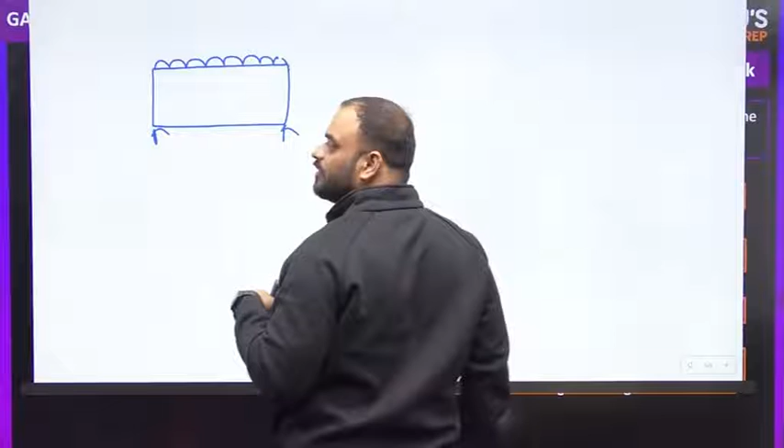Let us suppose this is an element, let's understand in detail. Kindly see this particular beam, and let us consider a UDL placed on the entire span, with simply supported conditions. Now I will take an element from the bottom, below the neutral axis. This is our neutral axis.

Now what are the various types of stresses which will be applied on this particular element? That is the question. First is our BMD, bending moment diagram. Second is our shear force diagram. The bending moment at this particular point is equal to zero, but the shear force value is maximum at the support. That means if we take out the element, it will look like this.

Now if the shear force is there and it is maximum, we have the shear stresses in this direction. But there is no bending compression or bending tension on this element. If you try to resolve this element, you may observe resultant stresses in this particular direction, meaning we have a tension force in the concrete. If tension force is there, will the concrete fail in a brittle way or ductile way? It is a brittle failure. So if you do not provide shear reinforcement, the concrete tries to fail in tension, and such type of failure is brittle failure.

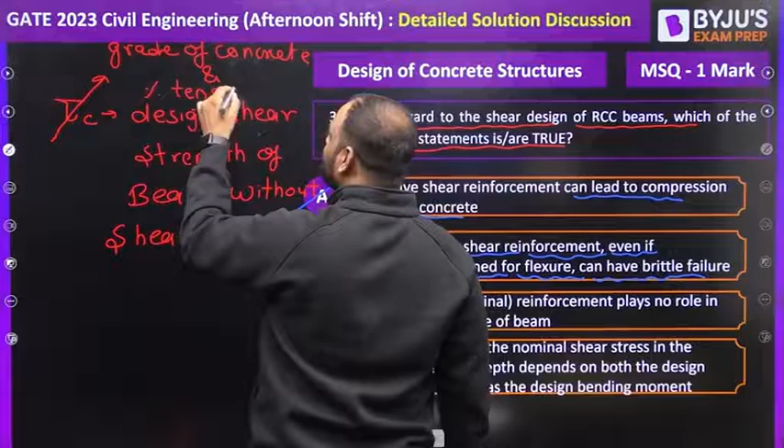If it is without shear reinforcement, this value will be based upon two things: one is grade of concrete, and second is percentage tension reinforcement. And you know that the value of tau c will change on the basis of percentage tension reinforcement. So the main reinforcement plays no role? No guys, it will play a very important role in the shear strength of the beam. That's why this statement is wrong.

Now the last one: as per IS 456-2000, the nominal shear stress in beams of varying depth depends upon both the design shear force as well as the design bending moment value. Yes, it is true. Let me show you the expression also. So guys, let us suppose we have a beam with varying depth.

We have a beam which has varying depth. Let us suppose it is making an angle of beta at this particular location. To calculate the nominal shear stress on this beam in which the depth is varying, the formula is Vu plus Mu tan beta divided by D, and this value divided by B into small d. This nominal shear stress depends upon Vu value, moment value, angle, and B and D value also, right?

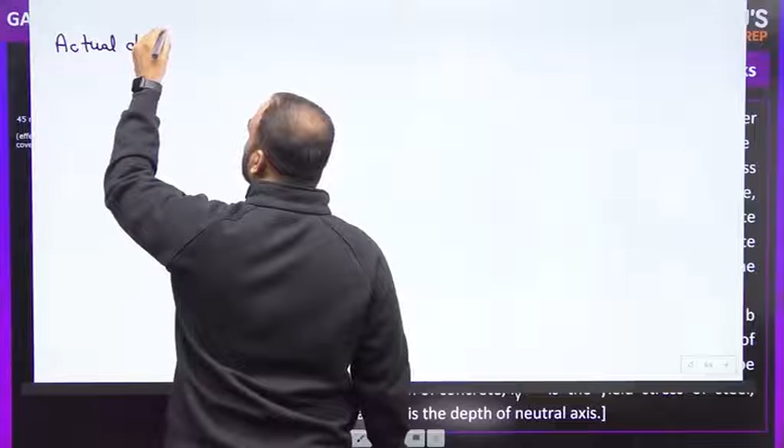If you want to find out the limiting depth of neutral axis and the actual depth of neutral axis, we have different formulas. Let's understand the first one to calculate the actual depth of neutral axis, which is nothing but XU.

To calculate this, the formula is C force equals T force: 0.36 FCK B into XU, which equals 0.87 Fy into AST. Now let's put the values: 0.36 FCK is 25, B is 300, we don't know XU, 0.87, Fy is 415, and AST is 3 into pi by 4 into 28 square, because the diameter of reinforcement is 28. If you calculate this, you get the value of XU, which comes around 247.01 mm. This is our XU.

Now the next one we need to calculate is XU limiting, the limiting depth of neutral axis. XU limiting equals K into D. What is the value of K for Fe415? It is 0.48. So 0.48 into small d. Small d equals how much, which we have already calculated?

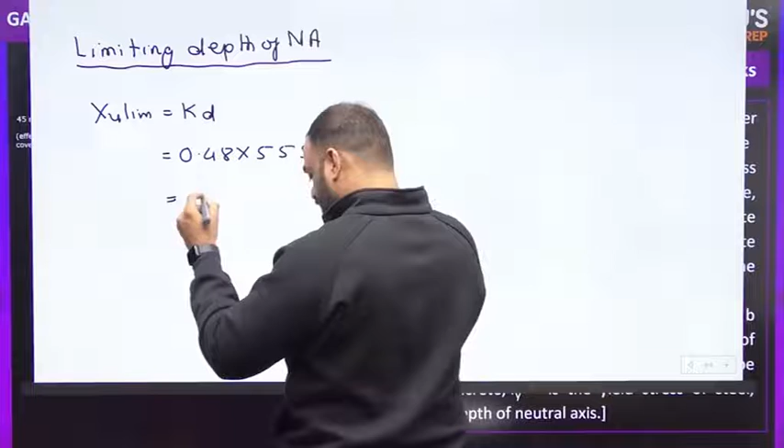Under reinforced section. If it is an under reinforced section, the formula is very easy to calculate the moment of resistance. So let's calculate MR. MR equals C force into lever arm. C force is how much? 0.36 FCK B into XU multiplied by lever arm, which is D minus 0.42 XU.

This is what we have, so let's put the values: 0.36 FCK is 25, B is 300, XU is 247.01, multiplied by D which is 555 minus 0.42 XU, XU again being 247.01, bracket close, then multiply by 10 raised to power minus 6. Ultimately you get the answer, which comes around 300.95 kilonewton meter. That means it is approximately equal to 301 kilonewton meter.

Getting the point or not? I hope all of you are able to understand this particular problem in detail, how to solve it.

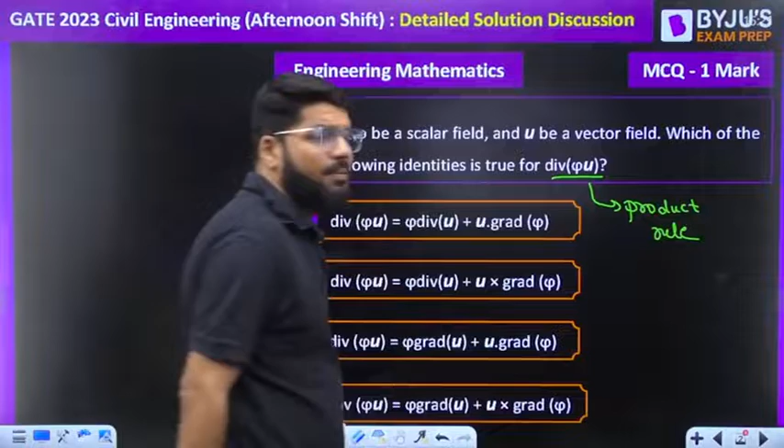This is a direct property question, dear students. Let phi be a scalar field and u be the vector field. Which of the following identities is true for the divergence of phi u? Simply apply the product rule. Many of you might be remembering this identity, and if you don't, just remember the product rule of differentiation. By the logic, divergence of phi u.

So now if I take phi constant, I will be taking the divergence of u, since u is a vector. Plus, next time u will be constant, and then you take the del with phi, which for a scalar function is the gradient, so del phi. Now gradient is also a vector and u is also a vector, so between vector to vector it is either dot or cross product, but the left hand side is dot product, so here it is dot product. So the correct option is phi divergence of u plus u dot gradient of phi. The correct answer is option A.

Let us move to the next question. Question number 40: Which of the following probability distribution functions has the mean greater than the median? It is a concept of skewing that is normally expected in civil. This one is a symmetric graph, so here mean will be equal to median.

This one is right skewed, that has a larger tail towards the right, and for right skewed the mean is greater than the median. The third one is left skewed, and for left skewed the mean will be towards the left, so mean will be less than the median. So the correct answer for the question is function number 2.

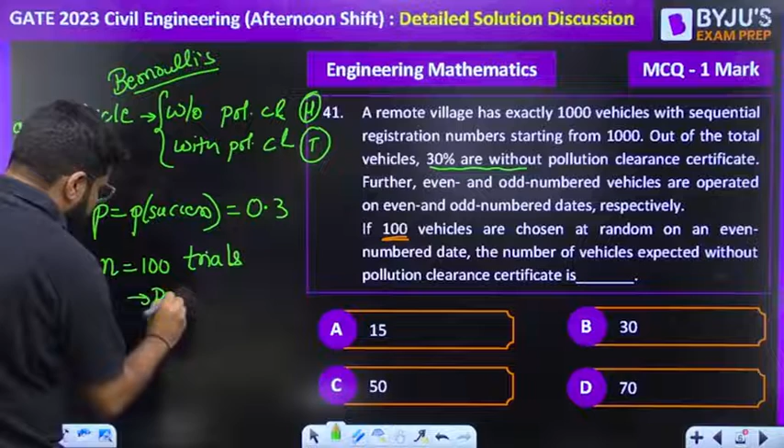The expectation formula for binomial distribution is given by n into p. The mean of binomial is given by n into p. So n is equal to 100, p is 0.3. Answer for the question is comfortably 30, that is option number B.

Next question, number 42. For the matrix A given to you, which of the following statements is or are true? It has a unique solution, does not have a unique solution, etc. There are a few options given.

The last option says it is a positive definite matrix. Let's see. First of all, is it unique or not unique? Let's check the determinant of A. That's going to be 1 into 2 minus 1, minus 1 into minus 1 minus 0, plus last one into 0. So this is 1 minus 1, that is 0. So what is the determinant of A? That is equal to 0.

So which of the following is true, given the determinant is 0? If the determinant of a matrix is 0, it cannot have a unique solution. So it does not have a unique solution.

So what type of solution does Ax equal to b have? It does not have a unique solution. It may have infinitely many solutions or no solution. For that we need some more checks. But it does not have a unique solution, confirmed, because for a unique solution, mod A should not be equal to 0 — it should be a non-singular matrix.

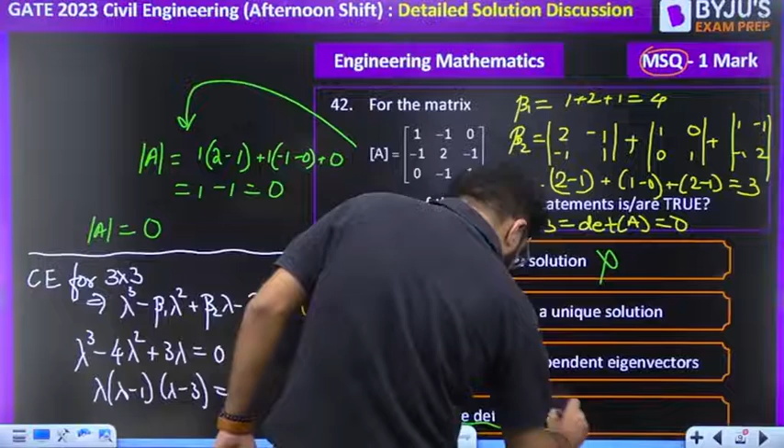A is a positive definite matrix? No, because for a positive definite matrix, all eigenvalues must be strictly positive. Yahan pe ek 0 aa gaya, right? So that cannot be a positive definite matrix. Then we will go for other checks, but it does not satisfy the first criteria only.

Let us move to the next question then. Very simple, for 2 marks now. This one is 2 marks. Previous one was MSQ 1 mark, but this is 2 marks, even more simple.

Okay, the solution of the differential equation is expressed as y equal to C1 e raised to the power 2.5x plus C2 e raised to the power alpha x plus C3 e raised to the power beta x. Okay, so it is of the form C1 e power m1x plus C2 e power m2x plus C3 e power m3x. Okay, that means what will be the roots of the auxiliary equation?

They are given as 2.5, alpha and beta. Acha, what is the auxiliary equation actually? The auxiliary equation, first term is third derivative, so it's going to be m cube minus 5.5 second derivative m square plus 9.5m minus 5 equal to 0.

Okay, so now add the roots. Very simply option se aa jayega. If I want to talk about the sum of roots property, sum of roots will be given by minus b divided by a, minus the coefficient of m square divided by coefficient of m cube. So that is actually plus 5.5.

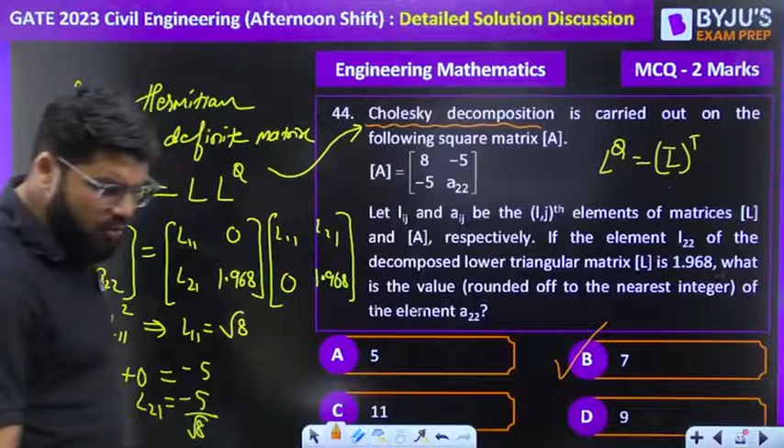Now two vectors belong to the null space, and the matrix is of rank 2. Whenever there is a null space, there is a nullity, and nullity is given by the formula n minus rank, where n is the number of variables, which is 4, minus the rank of the matrix. So nullity of the matrix is 2, that is 4 minus 2.

Now what is the meaning of this nullity? It means the number of linearly independent vectors within the null space. So that is the dimension of the null space. So the number of linearly independent vectors in the null space is 2.

The given two vectors are also linearly independent. Why? If they were somehow related, if one depended on the other, could 1 multiplied by anything give 0? Suppose this is x, suppose this is y.

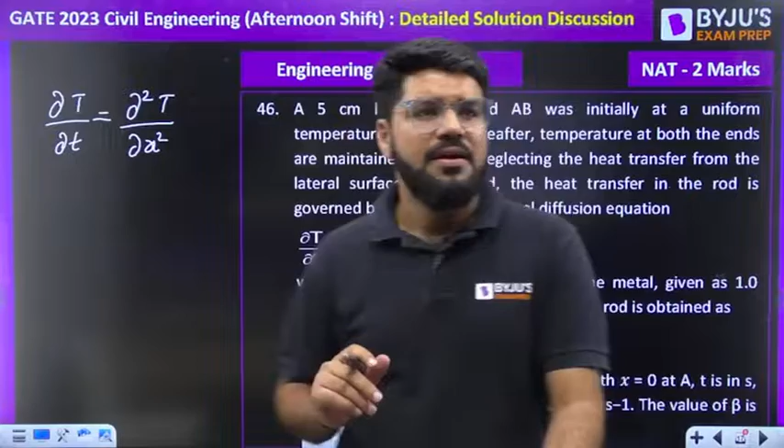Normally, if a student has studied partial differential equations, at least for civil and mechanical branches, you should remember the solution of the heat equation, Laplace equation, wave equation, etc. At least the heat and Laplace equation. But in case, just for clarity on how it is solved, I'll add on 2 minutes to that.

We will solve it using variable separable method. So T, which is a function of time and space, the space parameter is x, suppose. So T of x comma t is some function of x multiplied by some other function of time. We separate it: let us assume that T of x comma t is f of x into g of t.

So when you put this into the equation, differentiating with respect to time, f will be constant, only g's differentiation is equal to del squared T by del x squared. So when you differentiate with respect to x, you get the double derivative f double dash, but g is constant. So both of them are equal.

So I can say that f double dash divided by f is equal to g dash divided by g, and both of them are equal, and suppose both equal to minus k squared, as a standard way of taking the constant, to simplify the solution.

So what does the first one become, dear? The first one is f double dash upon f is minus k squared, so f double dash plus k squared f is equal to 0. What is the second one?

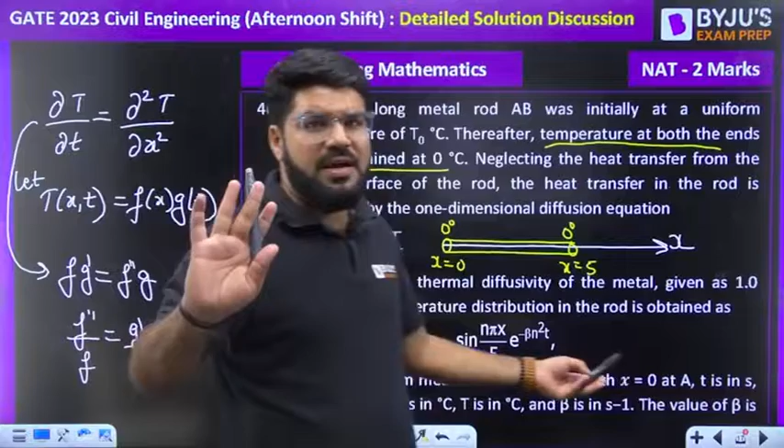You are able to see that e power minus beta n square t, and I want the value of beta. If you compare, this is the term beta n square t, right? N square t is separate, so what is beta? Beta is equal to pi square by 25.

Since this is a NAT question, let me write down its answer here. Just a second, let us calculate this value.

0.395. So approximately the answer that is coming is 0.395. I think they have mentioned for 3 decimal places. Okay, nothing else is mentioned, no problem. So the answer is 0.395. That's the correct answer.

Let us now move to the next question. This is again on temperature distribution, this time satisfying the Laplace equation. The steady state temperature distribution in a square plate ABCD is governed by the 2D Laplace equation, given by del square T by del x square plus del square T by del y square equal to 0. The side AB is kept at temperature 100 degrees and the other 3 sides are kept at 0 degree. Ignoring the effect of discontinuities in the boundary conditions at the corners, the steady state temperature at the center of the plate is T naught.

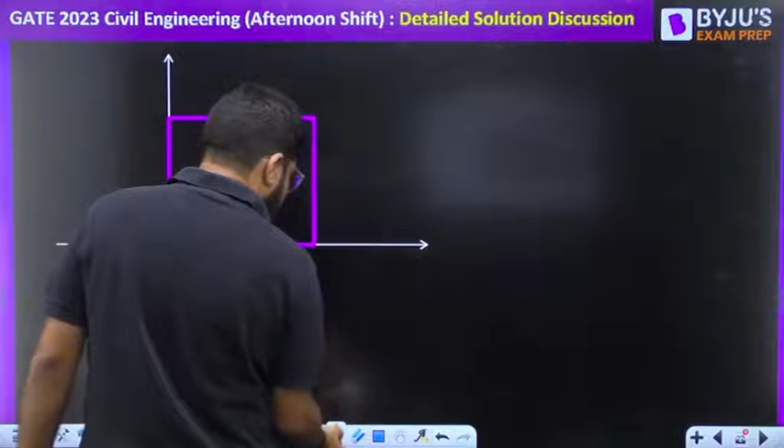Okay, let's say this is the plate, this is the x-axis, this is the y-axis, this is my square plate ABCD. Now this particular side lies on the x-axis, where y will be 0, so I can write this as T of x comma 0. Then this is the y-axis onto which x will be 0, so T of 0 comma y can be anything.

If I talk about here, this is T of x comma, this line is parallel to the x-axis, so y is constant and that is equal to L. Suppose the square is L cross L — I have taken a square of dimension L cross L, where L can be anything, that's not really going to matter, you can take it 1, 100, 20, anything. And this is going to be a line parallel to the y-axis, so x will be constant, suppose that is L, giving T of L comma y.

Now, take any 3 sides at 0 degree, and for simplicity let's take these 3 at 0, and let's take this one as the 100 degree, although you can swap it according to you. Once you understand the solution, you can take the conditions according to you as well.

Okay, so del 2T by del x square plus del 2T by del y square. Temperature is clearly a function of x and y, and because it is a function of x and y, let us once again assume that the temperature is a product of two functions, f of x and g of y, variable separable, right? Once again, like the previous question, I will start by taking the variable separable approach.

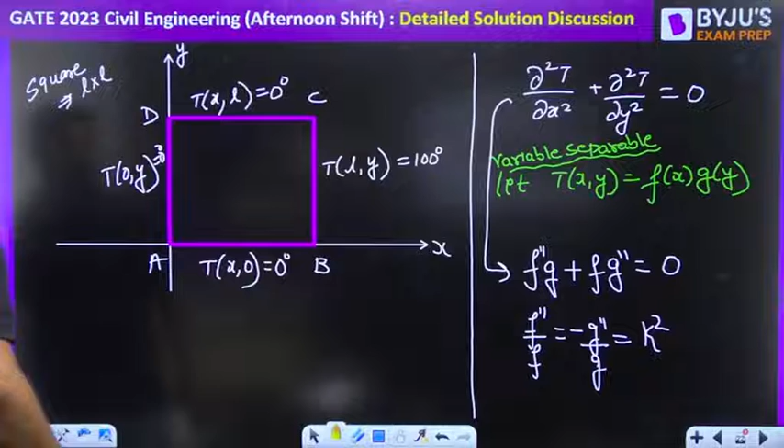Okay, now what are the boundary conditions? Let us come here. So let me write down the boundary conditions here, it is seen in the picture. These are the boundary conditions, so no need to write them separately. Let us use the first one, starting with the x-axis.

For that, let me write down T here once again, so that it is on screen: T equals C1 e power kx plus C2 e power minus kx, whole multiplied by C3 cos ky plus C4 sin ky. This is again a function of y.

Now, first condition: T of x comma 0, so in place of y we put 0. T of x comma 0 is 0. Let us use this condition, and I should be getting C1 e power kx, no change in the x term, plus C2 e power minus kx, multiplied by, in place of y put 0, so C3 cos 0 is 1 plus C4 into 0, this is whole equal to 0, right? So what is the only possibility? This is a function of x, we can't disturb it. The only thing is C3 comes from here, C4 is already cancelled, so C3 must be 0.

C3 must be 0. Okay, and then let me put down the second condition. So after this, what is my temperature function now? My temperature function is now just equal to C1 e power kx plus C2 e power minus kx, whole multiplied by only C4 sin ky.

Only C4 sin ky. Now let me put down the second condition. What is the second condition? The temperature at... let's take the simple one first, the 0 one: temperature at (0, y) is also 0 degrees. Let us put down this condition.

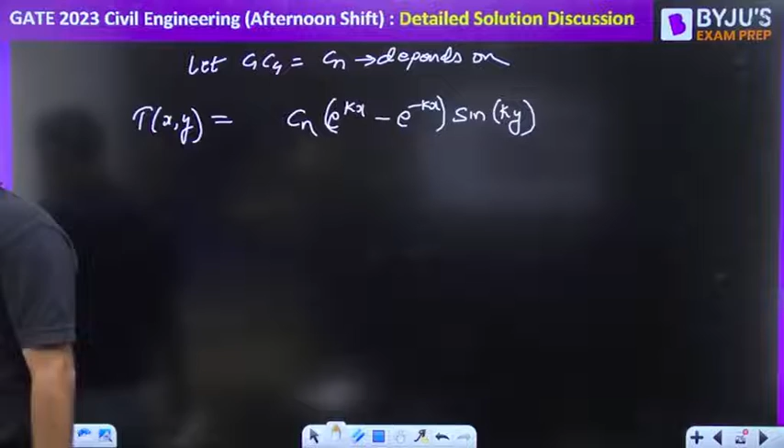But again, applying superposition, you have to add all possible harmonics, so we put a summation here. This can be written as - since e power theta minus e power minus theta divided by 2 is the sine hyperbolic function - you can write it as 2 sine hyperbolic theta.

So your temperature as of now looks like summation of 2cn sine hyperbolic kx, where we substitute k as n pi by l into x, times sine of ky, where k is again n pi by l into y. This is the function as of now.

Now let us come to the next boundary condition, the fourth boundary condition: of the side at 100 degrees. Which side is at 100 degrees? T of (L, y) is 100, that is T of (L, y) equals 100.

T of L, y is equal to 100 degrees. Let's use this. T of L, y means, what is going to be the value of the kx term here? What is going to be kx? K is n pi by L and x is equal to L, so you are left with n pi.

So the temperature is summation 2cn sine hyperbolic n pi x by L, the L cancels, leaving sine hyperbolic n pi, into sine of ky. Let's keep k as k for now, we'll simplify later. Into sine of ky, this is equal to 100 degrees.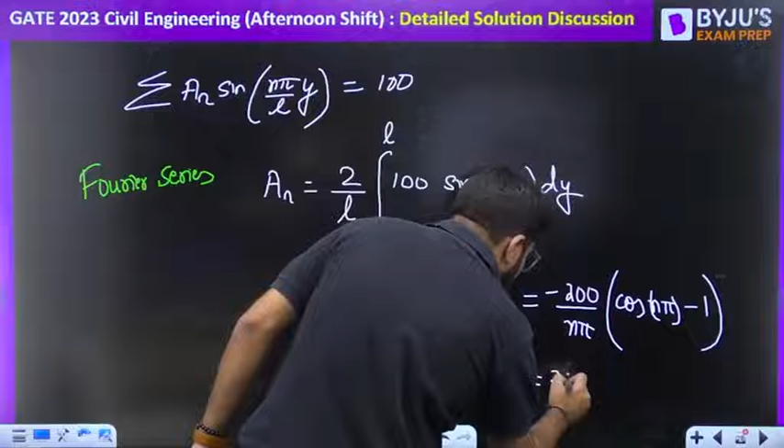Further, let's break this down. Minus 200 by n pi into what? This is equal to minus 200 upon n pi into what? If you take n equal to 1, cos pi. If you take n equal to 3, cos 3 pi. So cos pi, cos 3 pi, all of them are minus 1. So minus of minus one will be minus 2.

But that is only if you take n equal to odd. On the other hand, this is minus 200 by n pi multiplied by 0 whenever you take n even. Cos 2 pi is 1, cos 4 pi is 1, 1 minus 1 is 0, so it's written as 0 if n is equal to even. So only odd harmonics will exist.

So what is going to be the value of an? The value of an is actually equal to 400 by n pi, for n equal to odd. Only odd harmonics are allowed. 400 by n pi, so the value of an is obtained.

If an is obtained, what is an? 2cn sine hyperbolic n pi is equal to an. So what is the value of cn? What is the value of 2cn finally? That is going to be an divided by sine hyperbolic n pi.

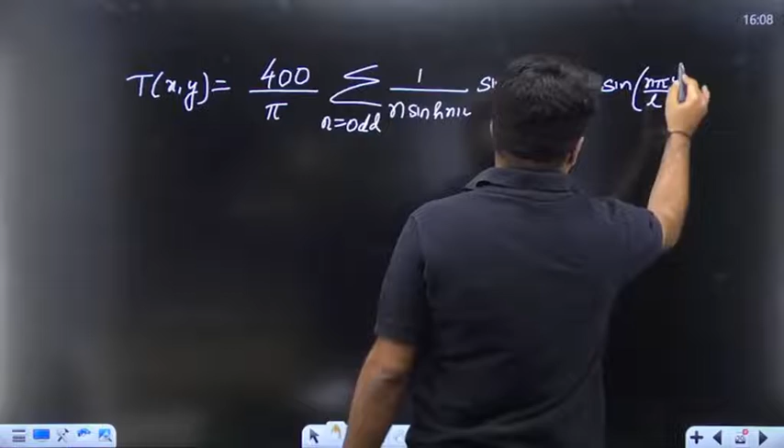So your final answer, now we come to the numerical part: that is equal to 400 upon pi, taken outside, summation for n equal to odd values, 1 upon n sine hyperbolic n pi, into sine hyperbolic kx. Substituting k as n pi by l, we get sinh(n pi x/l) into sin(n pi y/l). This is the temperature function, guys, beautifully derived. I've taken time, but I've explained the entire thing.

I've taken time, but I've explained you the entire thing. Okay, so now let us continue forward and complete this.

Now, what is the temperature at the center of the square? That is L by 2, L by 2. So what is going to be the value of Kx? Kx is n pi by L into L by 2, so that becomes n pi divided by 2. Similarly, Ky, which is n pi by L multiplied by L by 2, is also n pi by 2.

So now you get the term sine hyperbolic n pi by 2 divided by sine hyperbolic n pi. Now, sine hyperbolic theta can be broken down, just like sine theta: this becomes sine hyperbolic n pi by 2 divided by 2 sin hyperbolic n pi by 2 into cos hyperbolic n pi by 2, so sin hyperbolic is going to get cancelled.

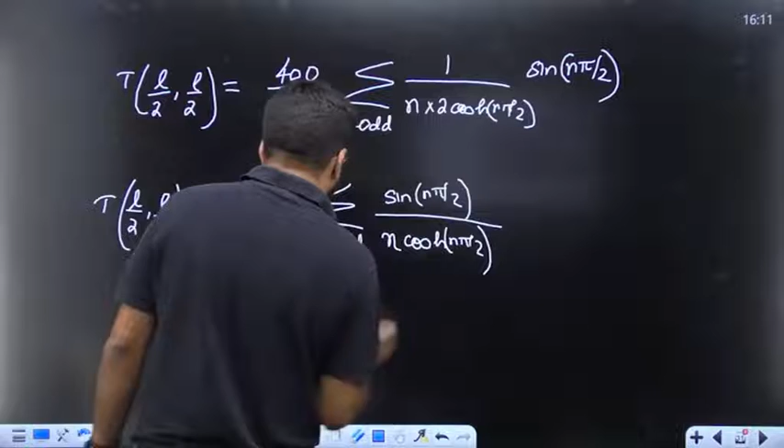Now sin pi/2 will be 1, divided by cos hyperbolic pi/2. Sin 3pi/2, sin 270, is -1, so we get -1 upon n, substituting 3, giving 3 cos hyperbolic 3pi/2. Plus 1 upon sin 5pi/2, again 1, divided by 5 cos hyperbolic 5pi/2. Minus plus etc, the next terms become really insignificant.

If you calculate even up to the first 3 terms, your answer will approximately turn out to be 24.99, which can be approximated as 25 degrees.

Done. So as I told you, mathematics was normally simple, but this particular question, and the previous one, were still okay because we were able to match the answer at least. But this one was really calculative - if you managed to do it, you can be proud of yourself, because it is time consuming, and giving this much time in the exam hall is really difficult. Now let us go to the next question.

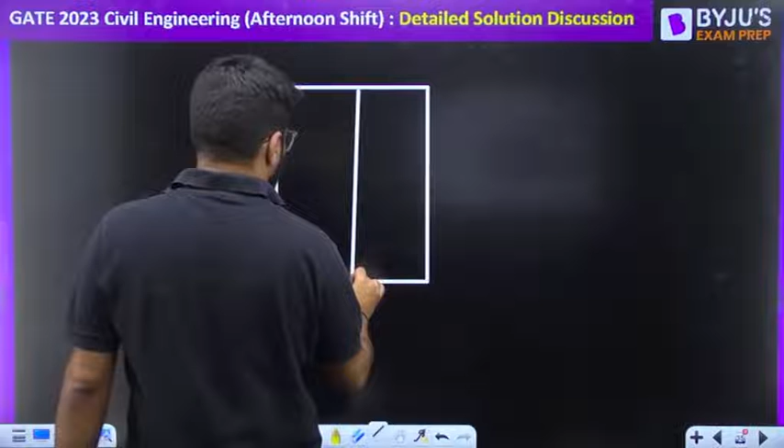Now to solve this, very simple fundamental, let me explain by taking this grid. Suppose you start with any one column, right now there is no shading, you fix any one. In the first column, how many squares do you have? 3, so you have 3 possibilities.

Suppose you have shaded this one. So when you go to the second column, you cannot shade this because it would be a repeated row, you cannot repeat in a row. So you have 2 options for the second column. Now suppose you have selected this one. When you go to the third column, you cannot select the second one or the first one because repetition in the row will occur, so only one possibility remains, only one cell will be left, so only one choice.

So as per the principle of multiplication, the answer is 6, the number of choices at every stage. I divided the cells into 3 stages - the 3 columns, though you can divide row-wise also. First column 3 possibilities, second column 2 possibilities, third column 1 possibility. Answer is 6, that is option number D. Moving ahead.

Question number 51, this is again simple. There are 4 red, 5 green, and 6 blue balls inside a box. If n number of balls are picked simultaneously, what is the smallest value of n that guarantees there will be at least 2 balls of the same color? What is the smallest n?

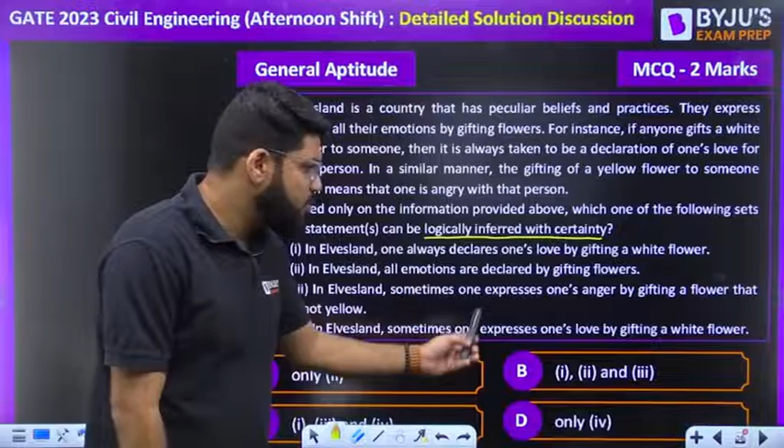Fourth, in Elvesland, sometimes one expresses one's love by gifting a white flower. Yes, sometimes, not every time, one expresses love by gifting a white flower. So the correct possibility is only statement 4. The correct option is D.

It is just a reading and logical conclusion question, not a verbal question. It is logical reasoning, but just based on reading the given information. Next question, it's for a 2-mark question, just because of the reading involved. Otherwise, the solution is very simple. Where is the next question?

54. Three husband-wife pairs are to be seated at a circular table that has 6 identical chairs. So you are given a circle that has 6 identical chairs. Let's say 1, 2, 3, 4, 5, 6.

Seating arrangements are defined only by relative positions of the people. How many seating arrangements are possible such that every husband sits next to his wife? So husband and wife will be next to each other, they'll appear as a pair, they will sit in pairs. So how many pairs?

3 husband-wife pairs. Where can they sit? Suppose you reserve this position, then this position, then these positions. So 3 pairs, and suppose these are the 3 positions. But what is the arrangement of 3 objects in a circle? That's circular permutation, guys.

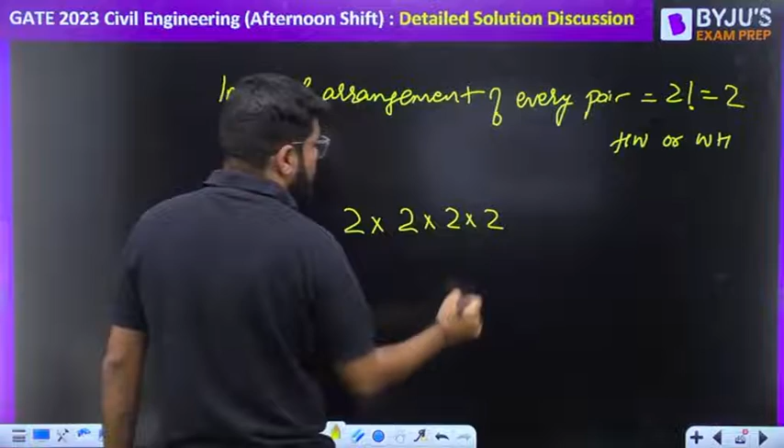For 3 pairs, that is 2, then internal arrangement of every pair. First couple 2 possibilities, second couple 2 possibilities, third couple 2 possibilities. So the total answer is equal to 2 into 2 into 2 into 2, that is 16. The total answer is equal to option number A, that is 16, dear. That is equal to 16.

Moving ahead to the next question, number 55. This is purely a verbal question based on passage and understanding. I shall not discuss verbal here, I will give you the answer key. The correct answer for this question is going to be D. Okay, let us move ahead.

A very simple question for 2 marks, really very simple. What is that? If x satisfies the equation 4 raised to the power of 8 raised to the power of x is 256, but 256 is 4 to the power 4. So comparing, you get 8 to the power x is equal to 4. So x's value will easily come, right?

Take the value of log, take log on both sides. So x is equal to how much? Log of 4 to what base? To base 8, because here it is 8 to the power x. In the exponent a to the power x, a is the base, so when you take log, the base has to be a, the base has to be 8. Now how to simplify this?

Log of 4 can be written as 2 square and 8 can be written as 2 cube. Whenever there is a power over the number, it comes outside and multiplied. Whenever there is a power over the base, that's a log property, it comes outside and gets divided. So now you are left with log 2 to the base 2. So the answer is 2 by 3 multiplied by 1, and that is 2 by 3. Log 2 to the base 2 is 1, answer is 2 by 3. The answer is equal to 2 by 3.

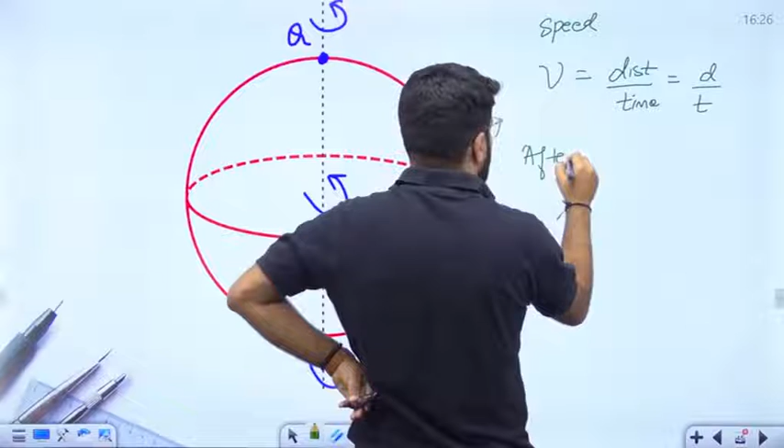Now, after one full rotation of the globe, how much is the distance traveled by Q? The globe is rotating about this axis, and Q is the point on the axis, so its net distance is 0. That means VQ is also 0. Now, what is the distance for R?

Okay, what is the distance for P? Let me assume this is the radius R (capital) and this is the radius small r. Distance traveled by point R is 2 pi small r, for one full rotation, equal to circumference. Distance traveled by point P is again equal to circumference, but the circumference is most at the equator, so that is 2 pi capital R.

So capital R is greater than small r, that is why the distance of point P is more than the distance of point R. That means point P is moving faster, so the velocity of P is greater than the velocity of R. And both velocities are greater than VQ because VQ is 0. So the sequence has to be P, R, Q. Answer is C: P, R and then Q.

Q is at the least. P, R and then Q. P most, then R, then Q. Q is up there, Q is at the north pole. North pole, correct. And then R is midway, so R is second. Correct, guys. Answer is C. Answer is C.

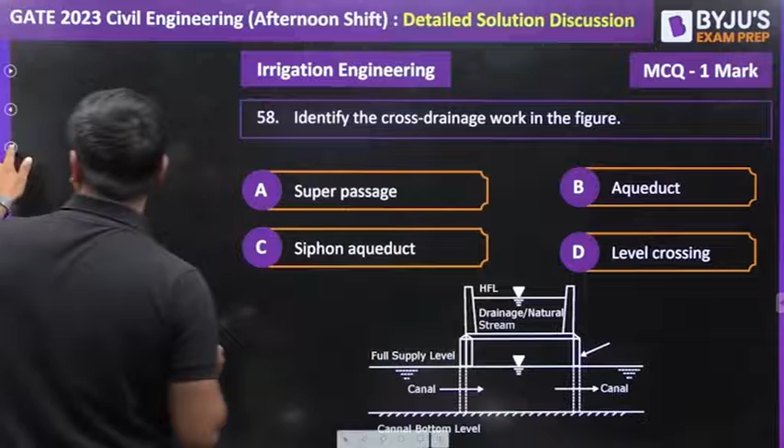Now we need to understand whether there will be a siphon or not, because then only we can answer. The bottom of the drain is far away, or above the full supply level of the canal. There is no need of siphon, nothing, no word of siphon should be mentioned. So the right answer is super passage, option 1. Definitely not aqueduct, not siphon aqueduct, because if canal was here and drain was here, then we can say it was aqueduct. If the high flood level would have been above the level of the canal bottom, then it can become siphon aqueduct. And obviously this is not level crossing, because in level crossing both of them are on the same level. Number one thing is this.

Next question is from highway engineering: which of the following is equal to stopping sight distance? This is MCQ. Brake distance required to stop plus distance traveled during perception minus reaction, wrong. Brake distance required to come at rest minus distance traveled. If we wait, they are basically saying braking distance plus reaction time, so option A is correct here.

I'll tell you, stopping sight distance is nothing but equals to 0.278 V into TR. This is your lag distance, distance traveled during the reaction time, plus V square by 254 F, if there is no gradient given. F is braking efficiency, plus or minus 0.01n% if you have the gradient also. So here the right answer is option A, which tells you brake distance required to come to a stop plus travel distance during the perception reaction time. Okay, I thought this was negative, I don't know why.

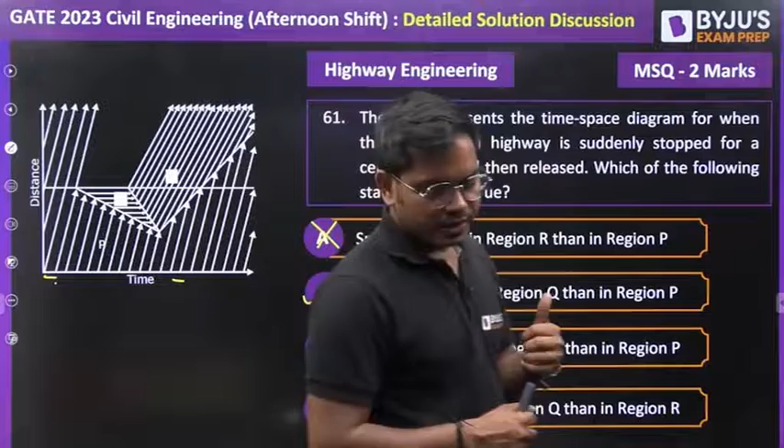Again the same concept applies here because of the halt condition. Here we have the halt condition, and if you compare the slopes also, you will get the answer that obviously the volume is going to be higher in region R than in region P. Next is density is higher.

Obviously when there is a halt condition, the vehicles stand very close to each other, which makes their density maximum. So density is obviously higher in Q compared to either region P or R. The right answer to this question was B, C and D.

Next question, consider the Marshall method. MSQ: the stability decreases initially and then increases. I think this is the opposite. Marshall stability, if I compare it with bitumen content, stability and bitumen content looks something like this. They are saying decrease then initially increase - wrong.

Flow value increases - yeah, that's true. Flow value versus bitumen content goes like this, so this is right. Air voids increase initially then decrease - actually air voids decrease. And the voids filled with bitumen, they increase. So B and D are definitely the right answers to this question.

Okay, let's move to the next subject, fluid mechanics. So here we have the diagram. The pressure in the pipe at X is to be measured by an open manometer shown in the figure. We can see here there is a fluid, fluid B.

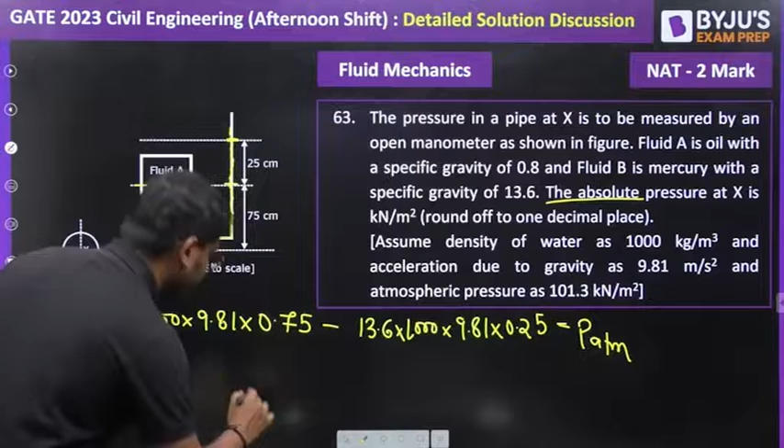140.54 kilonewton per meter square. That is going to be the answer, right?

Next question: which of the following statements is or are true? The thickness of turbulent boundary layer on a flat plate kept parallel to the flow direction is proportional to the square root. Actually, this is wrong. Why is this wrong? Because in this case they are asking about the turbulent case, so if we see the Blasius solution also, we know that delta by x.

I'm writing this for the turbulent case, right? So it will be 0.376 divided by Rex raised to the power 1 by 5. Here we have 1 by 5, and as soon as I open this, it becomes 0.376 by rho V x, meaning rho u infinity x by mu, raised to 1 by 5, and also this x will come here. So eventually delta is going to be proportional to x raised to the power 4 by 5. That is the whole point here, not square root. So this is a wrong statement.

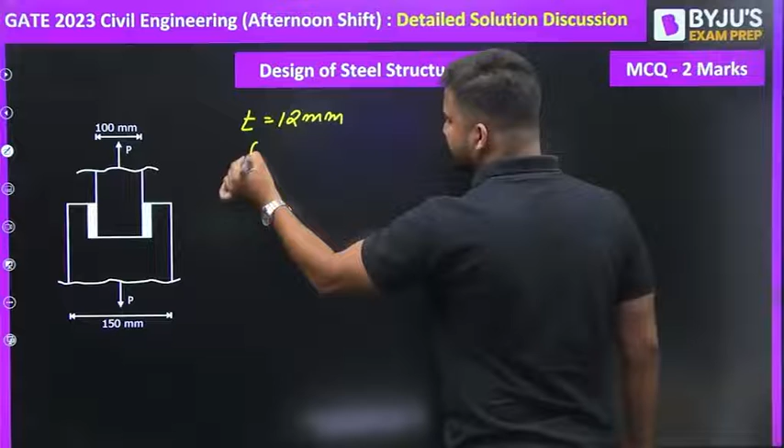Next they say the yield stress and ultimate stress of the steel under tension are 250 megapascal and 410 megapascal. So the steel used here to make the joint, its yield strength Fy is 250 megapascal, and its ultimate strength Fu given is 410 megapascal.

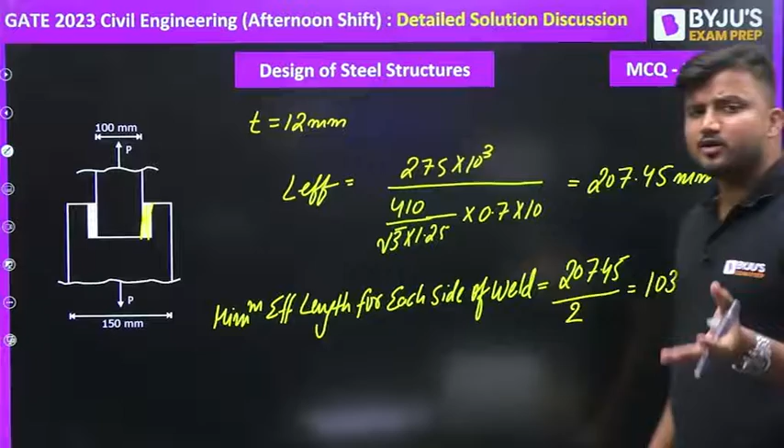so if minimum effective length - I can write minimum effective length for each side of weld equals 207.45 divided by 2. So this value will come out to 103.72 mm. Let's see what options are given.